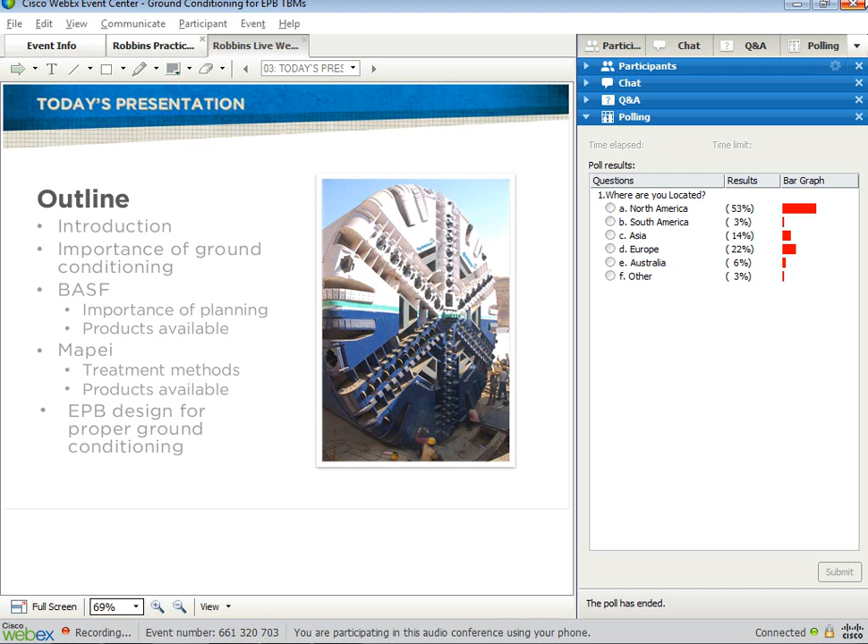Today's webinar is going to cover the introduction that I'm doing now, the importance of ground conditioning, which Desiree Willis will speak to. I'll introduce her in a moment. Then Jaime Ibarra from BASF will be talking about the importance of planning and products available from BASF. Richard Schulkins will be speaking from MAPEI regarding treatment methods and products available from his company as well. And then the last formal presenter will be Brad Grothen from the Robbins Company, talking about EPB machine design for proper ground conditioning. So with that, I'd like to get started right away by introducing Desiree Willis.

Desiree's been with the Robbins Company for almost 8 years now. She does research and a lot of writing. She's traveled the world visiting various tunneling projects. The latest research that she's done covered 25 projects, 10 countries, using 40 different EPBMs. The research that she and Joe Roby pulled from that white paper is really what led to this webinar. So without further ado, I'll introduce Desiree. Desiree, take it away.

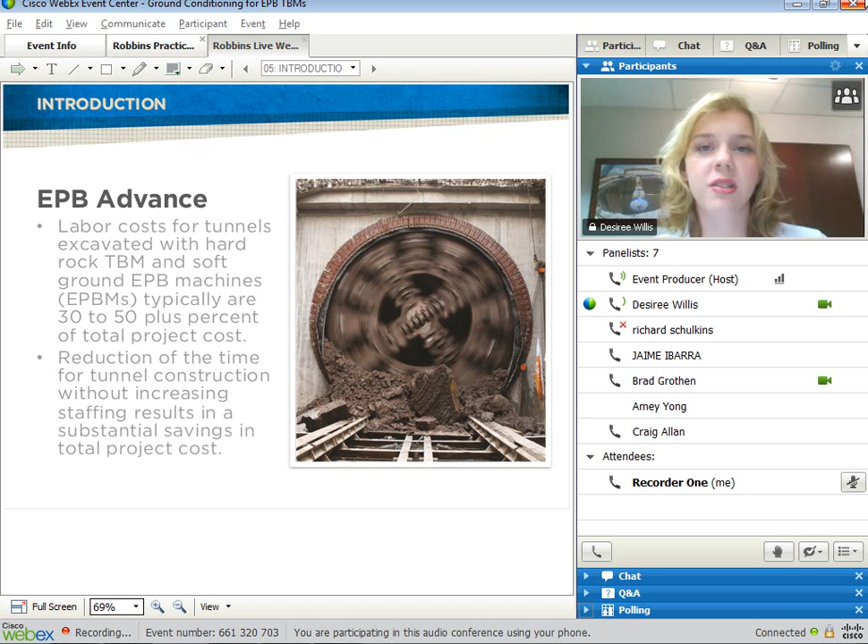Thanks, Craig, for that introduction. We're going to go over a little bit about a study that we worked on. Over the years, we've found that labor costs for tunnels have typically been 30 to 50% or more, and this is true whether it's a soft ground project or a hard rock project. With such high costs, we are constantly looking at ways to reduce the time for tunnel construction without increasing staffing, which could result in substantial cost savings on the project.

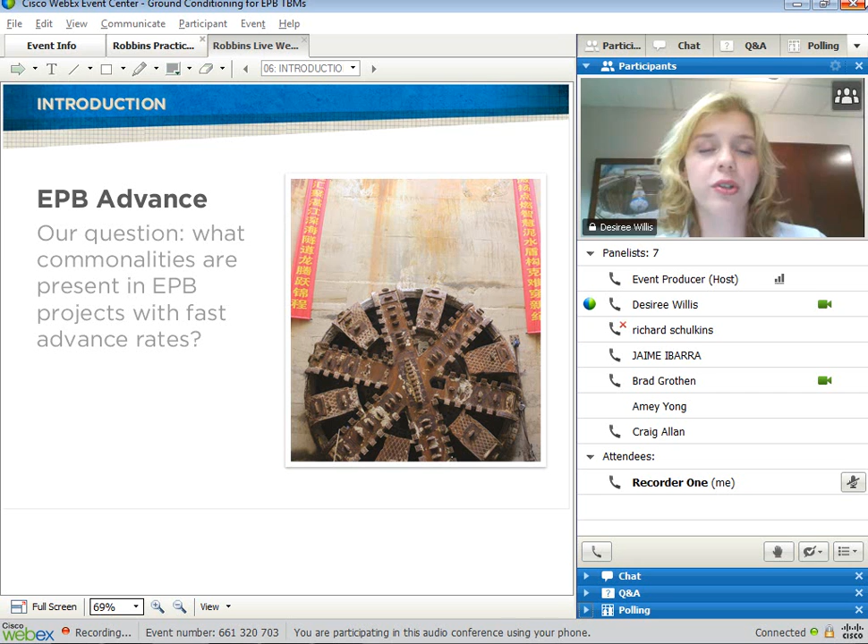So we asked ourselves the question: what commonalities are present in EPB projects with fast advance rates? In particular, we wanted to look at mixed ground projects because this is becoming a higher percentage of our EPB projects. By mixed ground, we mean a mixture of materials that are easy for EPBs to excavate, such as soils, clays, and sands, and a mixture of materials that are not so easy to excavate. That might be consolidated hard rock, large boulders that can't be broken up with disc cutters, and coarser sands and gravels.

So we looked at about 46 EPB projects from all over the world, all TBM manufacturers, and we were looking specifically at average weekly advance rates based on 2 twelve-hour shifts, 7 days a week. These advance rates were given to us by contractors on the condition that we kept the names of the projects anonymous, so it is numbers and specs only.

We looked at a few different factors: ground type, tunnel length, water pressure, type of drive motor (that might be VFD or hydraulic), ground conditioning, the type of muck removal (that could be continuous conveyor or muck cars), the cutting tools installed in the cutter head, the location of the project, and the experience the contractor had with EPBs.

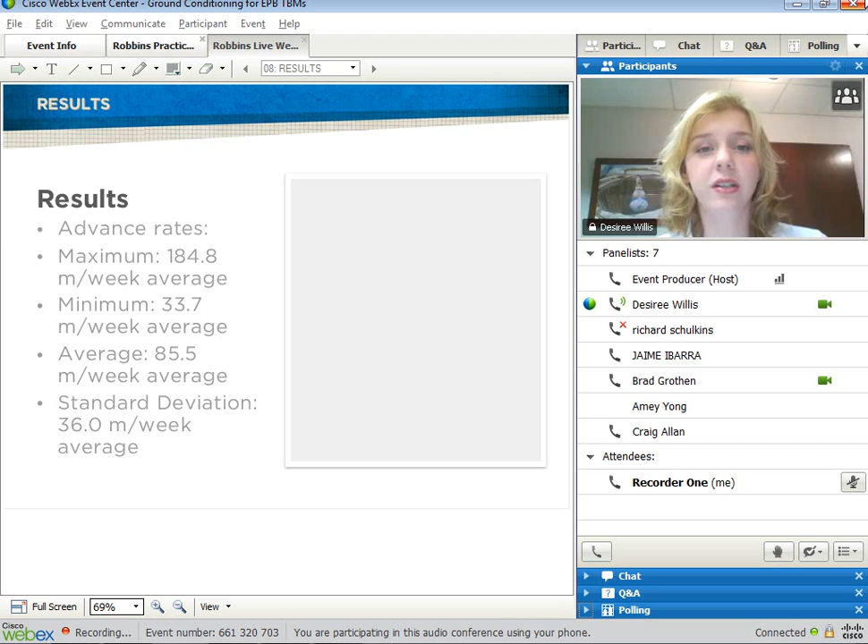This just had a breakthrough picture on it, but our results were wide-ranging. Our maximum advance rate was 184.8 meters a week. Our minimum was 33.7 meters a week. When we averaged all the projects together, it was about 85.5 meters a week. You can see it runs the gamut.

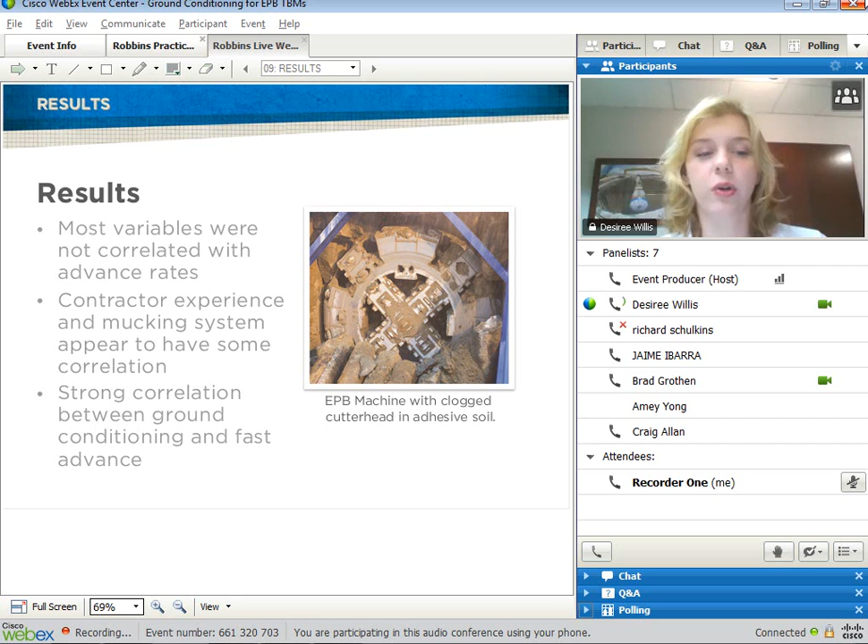When we looked at what correlated with advance rates, most of the variables were not correlated at all. Contractor experience and the type of mucking system were lightly correlated, but there was a very strong correlation between ground conditioning and fast advance rates.

With that, we'll come to our second poll question. In your opinion, what is the most important factor in determining EPB advance rates? You can answer A, machine design; B, contractor experience; C, ground conditioning; D, muck removal method; or E, geology and water pressure. We'll leave this open.

While we're waiting for the poll question to be answered, we've had a question come in. Desiree, somebody has asked, are there more materials I can read or presentations I can watch on these topics? Yes, definitely. We'll send out an email after this webinar detailing a few additional materials you can look at. In particular, we have a paper on this study that will be presented at the North American Tunneling Conference next week in Los Angeles, June 22nd to 25th. Our presentation is on Tuesday in the 1:30 session, so it should be around 4 o'clock, and the paper will be in the proceedings as well, so that's a good resource.

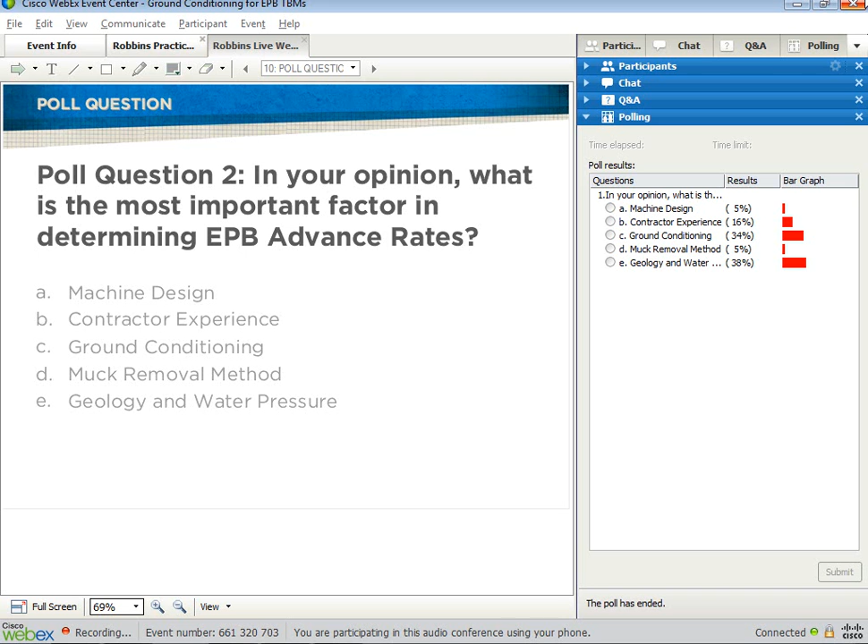Okay, you should see the results. Yes, it looks like a lot of people think ground conditioning, a lot of people think geology. I agree with both—I think that just affirms our results. Geology and ground conditioning really go hand in hand. So now we'll talk a little bit about ground conditioning in general and introduce the topic before we go more in depth.

Based on our study and what we have observed, ground conditioning is equally as important as machine design and the logistical aspects on any EPB project. Using ground conditioning can not only improve the muck flow through the cutter head, it's also been shown to reduce wear on the machine and increase advance rates.

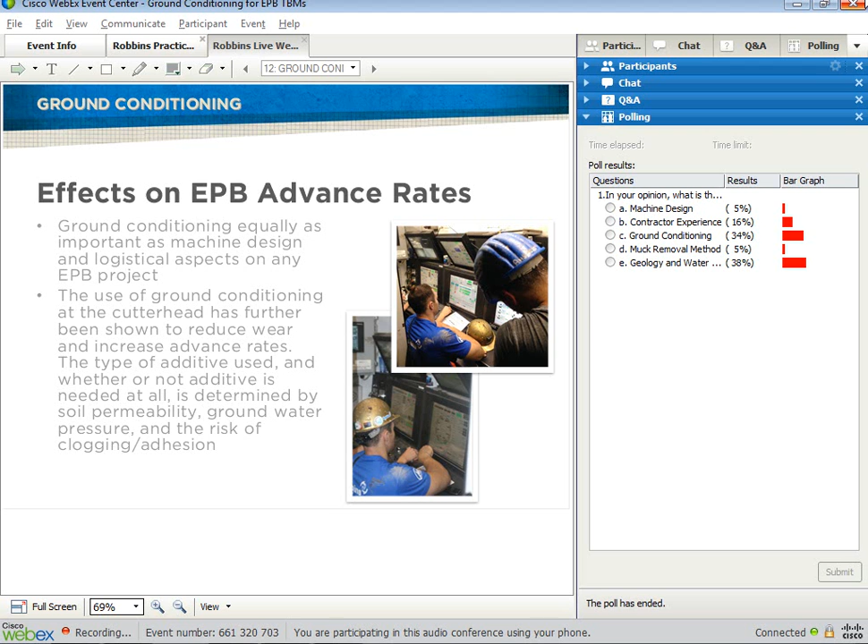Some of the imperative things needed for a program are an accurate geotechnical baseline report—a report that details the hydrological and geological aspects of the project. In addition, laboratory testing is absolutely necessary to determine the proper ground conditioning regime. Almost all projects have various different types of ground, and you need a sample of each to determine which type of additive works best.

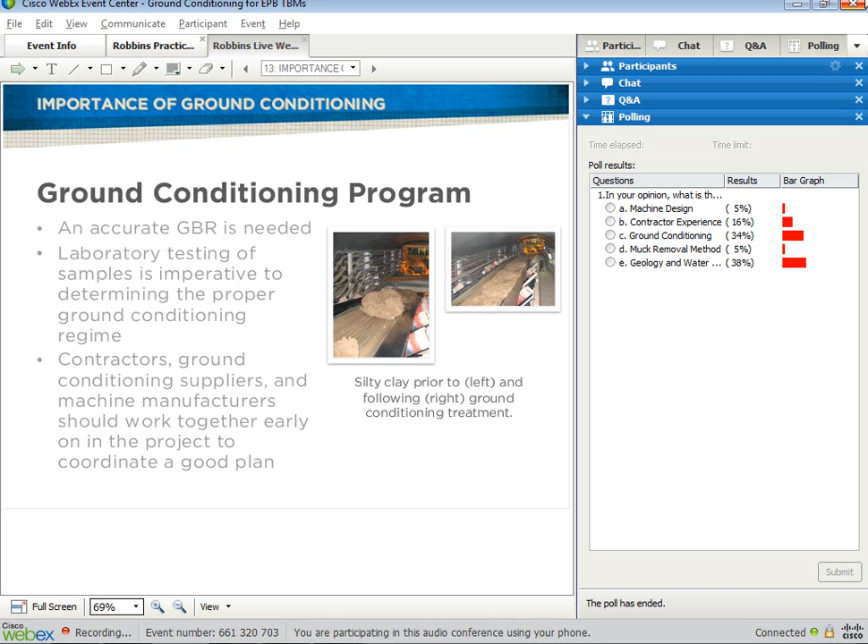Finally, contractors, ground conditioning suppliers, and machine manufacturers need to work together very early on in the process to make the program work correctly. This means even before the TBM is built, so that the machine can be designed to provide that proper ground conditioning program.

Here we're going to play a video. This is from one of our projects in Mexico, the Emisor Oriente wastewater tunnel. It will show a before video, before we added additives, so you can see how liquidized the muck is and how difficult it was to get through.

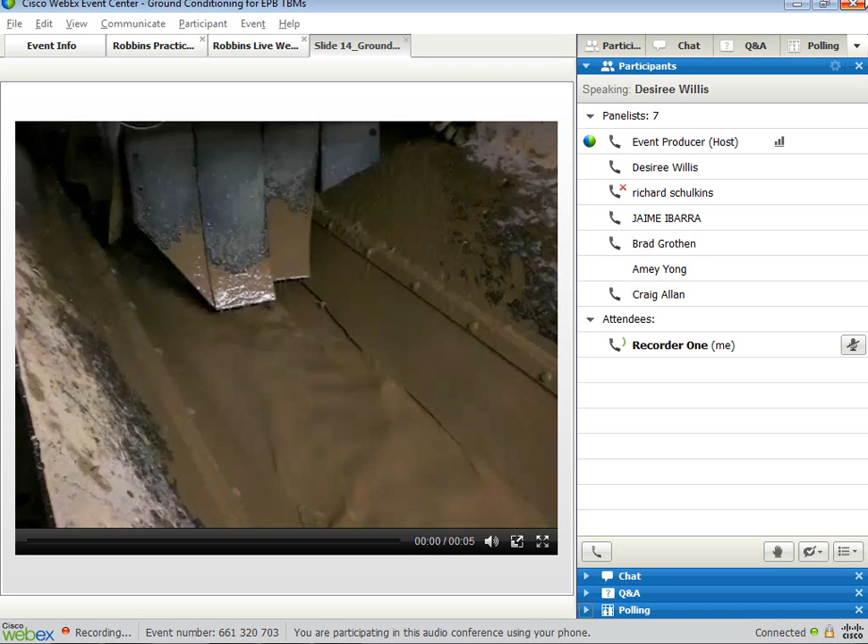Now we're going to show an after video, after we added the ground conditioning agent. This really helps to consolidate the muck and make it easier to remove. You can see the toothpaste-like consistency, which is really what is desired in ground conditioning—it just makes it easier to transfer the muck. We'll play it one more time.

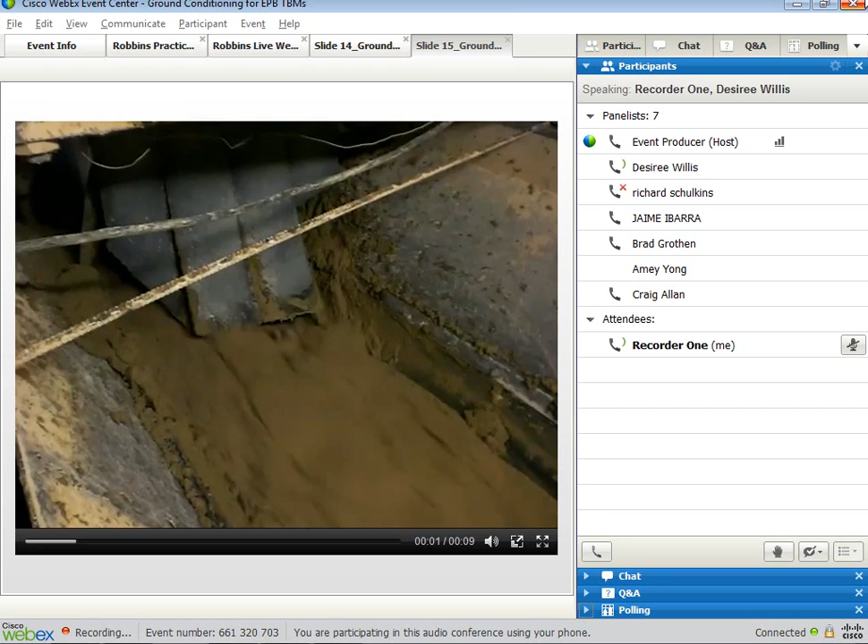Okay, so that is just an introduction on ground conditioning. With that, I'll turn it back over to Craig to introduce Jamie.

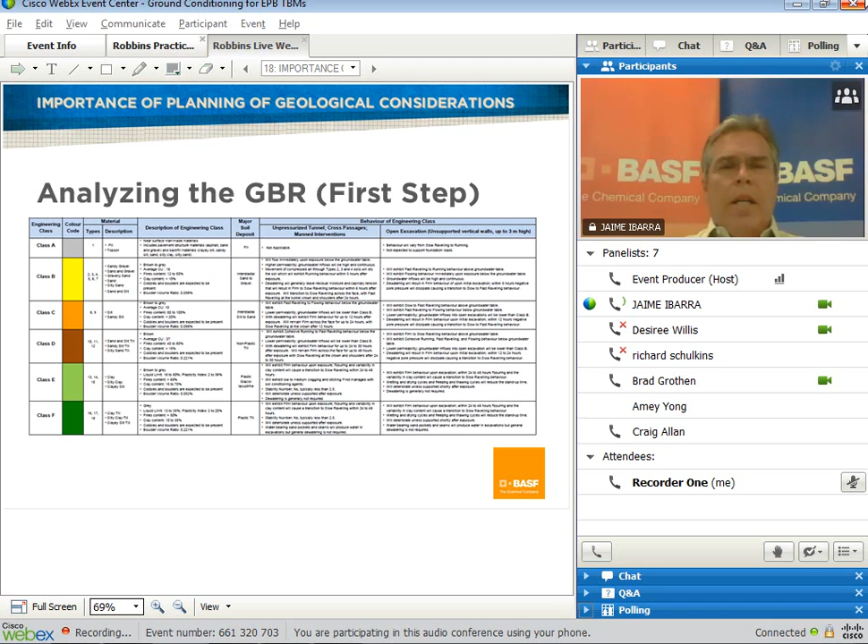On our side, the first step is very important: to have the GBR in our hand, as precise and accurate as possible according to the studies made by the geologist. We analyze this information very thoroughly.

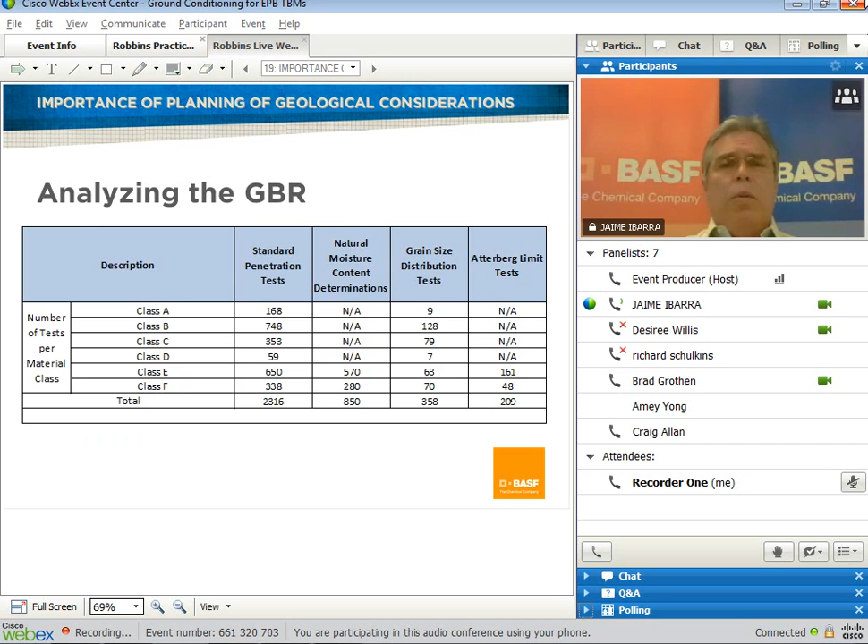We look into this information to evaluate what kind of soil or ground the TBM is going to be dealing with. Most of the time, we only see a portion of this geology profile because of the boreholes. The boreholes are made at a distance of between 100 meters, 500 meters, sometimes even a kilometer, so we don't know what is in the middle.

The geology is so important to us because the TBM is going to be dealing with different types of ground at the same time. Sometimes we have a mixed phase, sometimes a unique type of ground, which is ideal because it's very homogeneous, but most of the time we have different types of ground. The machine deals with soft ground on top, hard rock on the bottom, and clay on one side, and we need to know that information in order to do the studies in our lab.

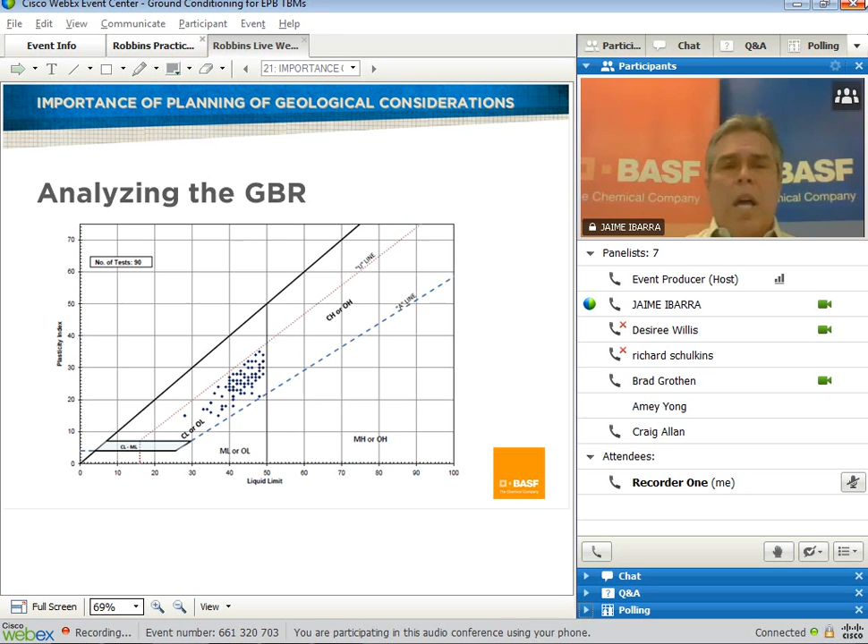So we analyze the GBR to see what type of ground we have. We look into the information to see if the ground is sticky, is coarse, is rock, and then we prepare ourselves for the next step.

The next step is the lab test. It's very important before the TBM is even launched. The TBM has already been designed by the manufacturer according to the GBR, and on our side we do the same analysis to determine and recommend what type of soil conditioning the contractor is going to need to prepare that ground for that type of TBM. So it's a reference point, always a starting point, and I would take it as a second step.

First step, analyzing the GBR. Second step, we see what the soil samples provided to us tell us, and then we can compare that with the GBR. So first we run the same tests that the geologists did for the GBR, but this time with the sample we get from the contractors.

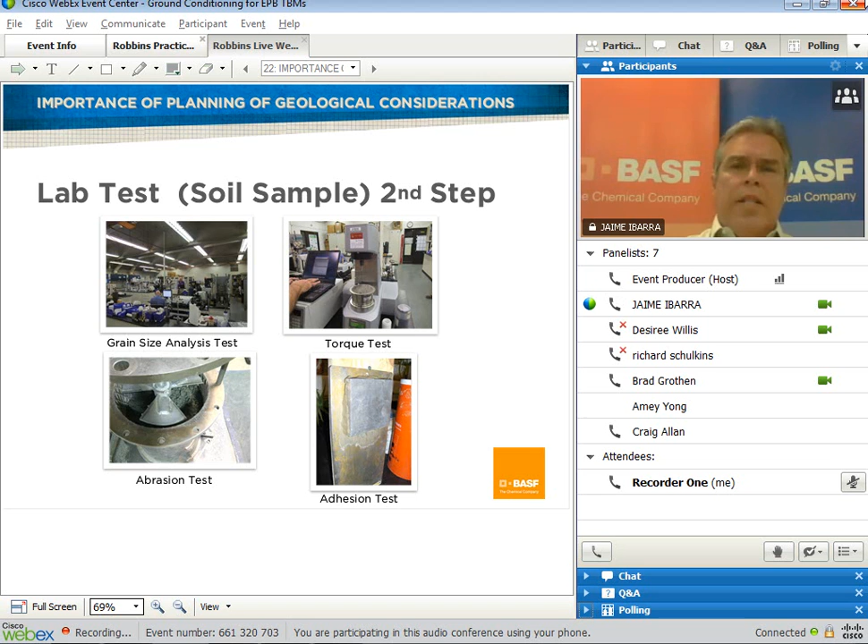We do all kinds of tests, as you can see in this slide: torque test, abrasion test, sliding test, grain size analysis, stickiness, and so on. Why are we doing this?

We're doing this because, as everybody in the industry knows, there's a range of different technologies for different types of geology. So if we're working in clay, we're going to use an anti-clay polymer. We're using sand with water. We're going to use another type of surfactant, with the polymer or without it. So it all depends on this lab test for the application of the technology we want to recommend to the contractors.

What we do is prepare the ground for easy transportation. EPB machines work in certain conditions. First of all, we need to fill up the chamber, guarantee that the chamber is full of material and not full of air, to guarantee the easy flow of the ground through the cutting head into the chamber, through the screw conveyor, belt conveyor, and then to the disposal pit.

But we also always need to think about how that material is going to be transported to the filling land or landfill places assigned to the project.

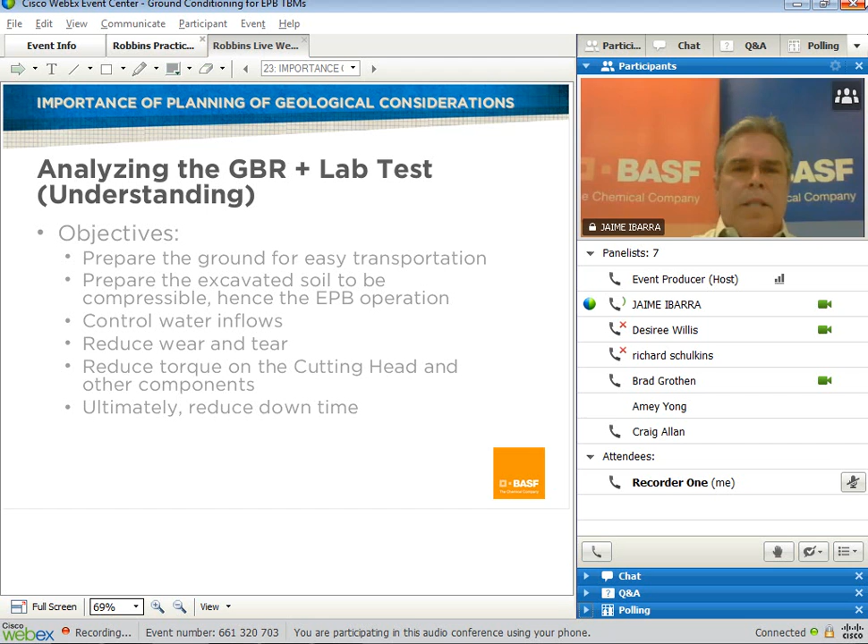While we're analyzing the GBR and doing the lab test, we can get the ground as it is from the project and prepare it to make it ideal for working in this EPB. What these ideal conditions are going to be depends on the operation of the TBM, the design of the TBM, and also the soil conditioners.

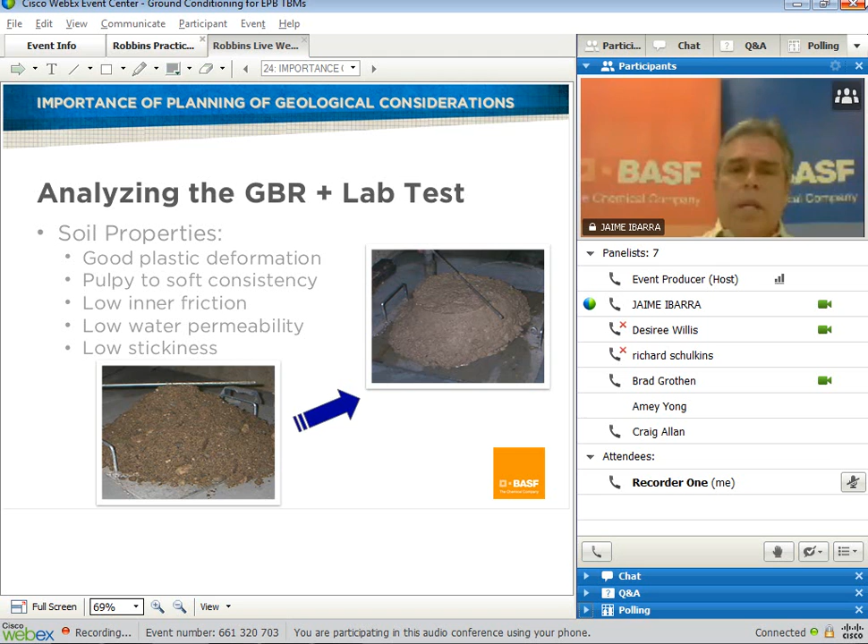As you can see in the pictures, this ground is given to us as very coarse sand, very rubbly, very loose, and we turn it in the lab into a paste that we believe will be the best condition for the TBM.

Here's another example of what we do in the lab. We test the material as it is before we apply any technology that can be used in this type of ground. In this case, it's a very sticky material - it sticks everywhere, it's sticking to this blade. It's going to stick in the cutting head, it's going to plug the cutting head, and therefore it's going to slow down the production rates.

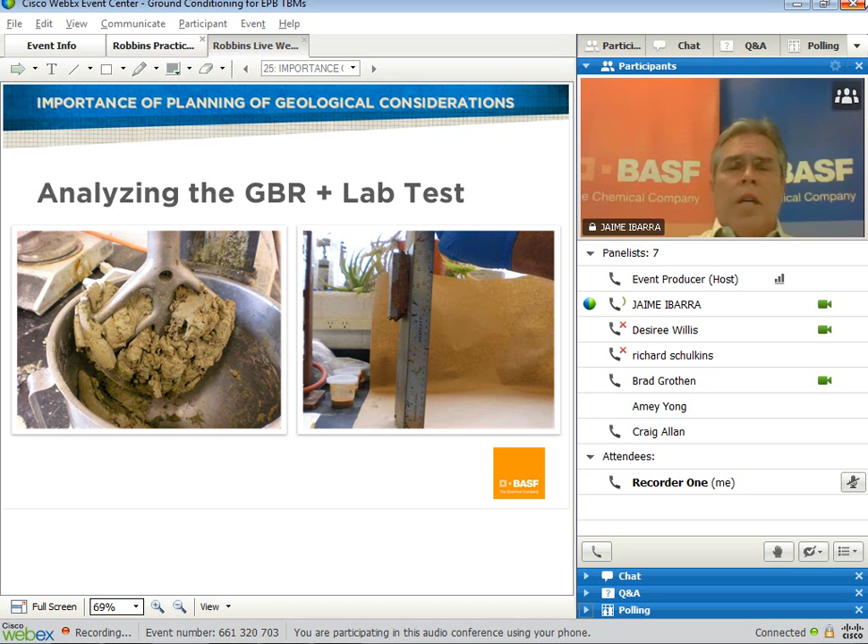We do another test we call a suction test or abrasion test. When the ground is very tight, it closes around the TBM, and the TBM needs extra force to propel forward. I don't call it friction force - it's more like a suction, a vacuum pulling the machine, not letting it go because it's too tight around the machine.

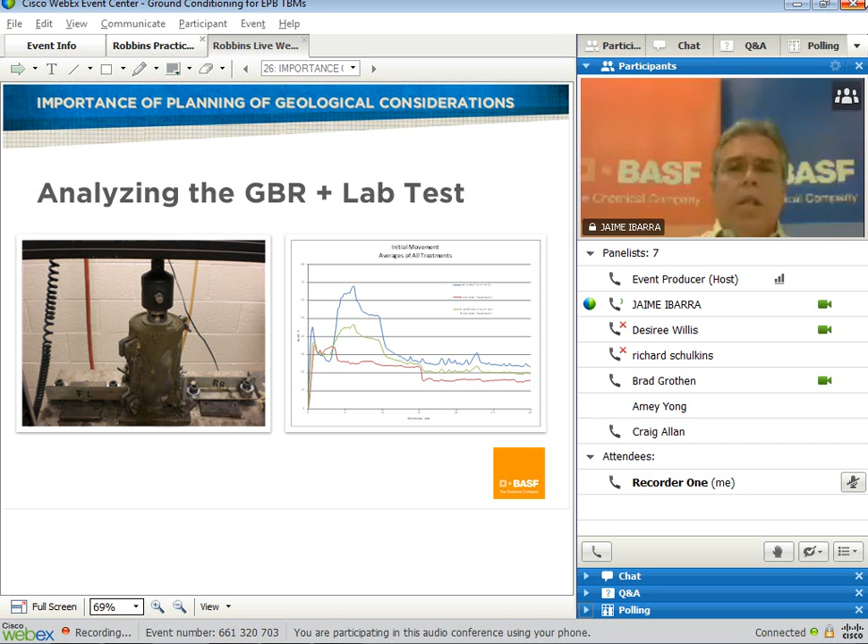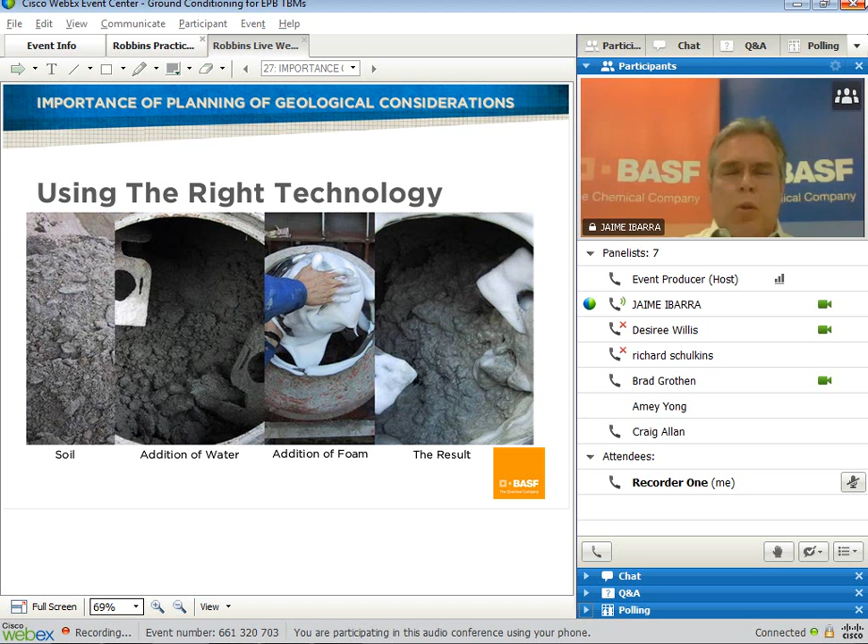So we need to know how the ground is going to affect the TBM, and affect the production or advance rate. What we do is analyze the GBR, perform lab tests, and apply the right technology to the geology given - using what we believe is the right technology for that type of geology, preparing the ground for the TBM to be successful.

So now my next slide is just to give you some examples of proper soil conditioning after testing. I believe Richard Schulkins from MAPEI is going to talk about applications on the job site, but these are some samples we can show today as a result of very good analysis of soil conditioning.

On the left-hand side, this is the Ballard Siphon in Washington. They had oversaturated sand - I believe it was 20% oversaturated. We turned it into the right side, ideal for transportation, and the TBM finished the tunnel successfully. They were having a lot of problems in that project until we did the lab test and came up with the solution.

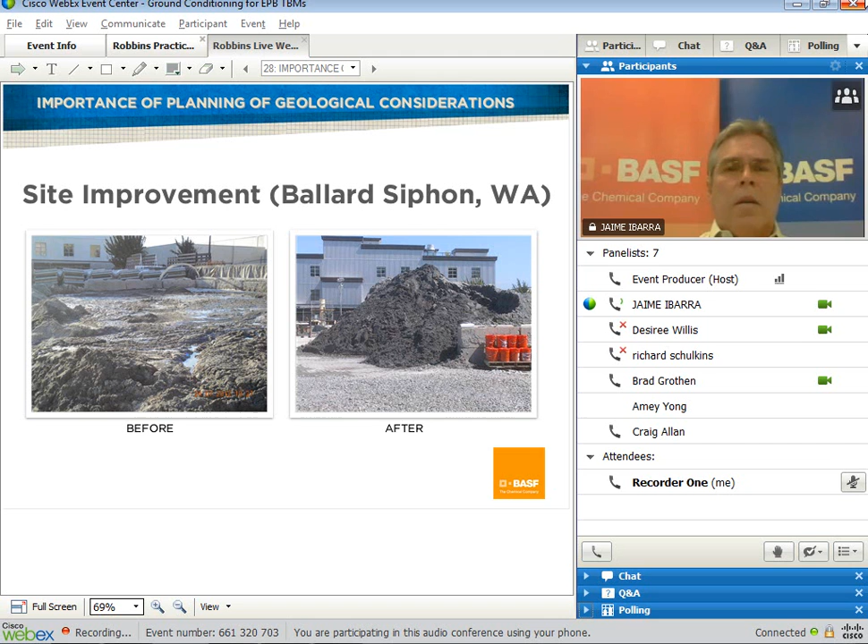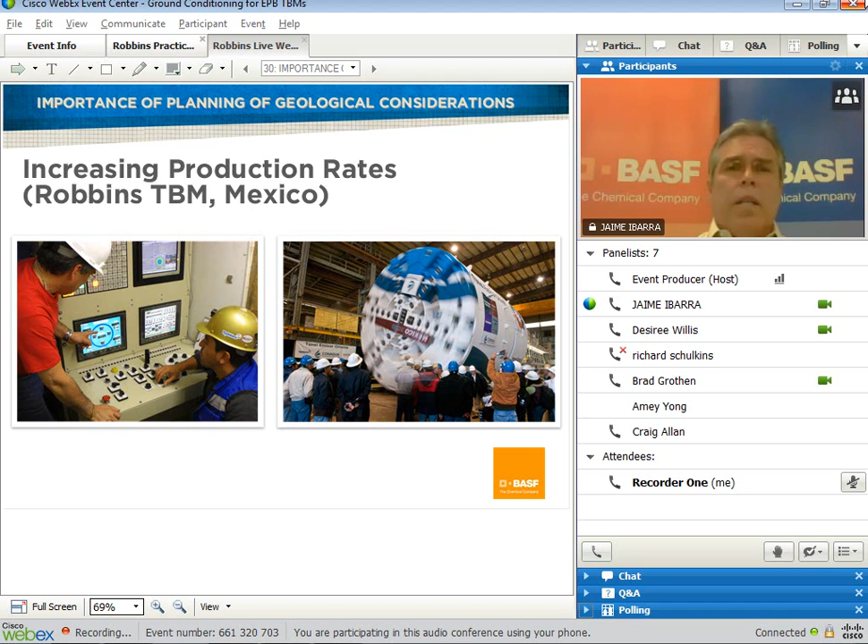In Mexico City, I talked about this project already, but the clay they were having was slowing the TBM to 35 millimeters a minute, which for a lot of people is a good rate. For us, everything can be improved. We came up with the right technology for the type of geology they were drilling, and the machine went from 35 to 93 millimeters a minute - moving forward at the right speed.

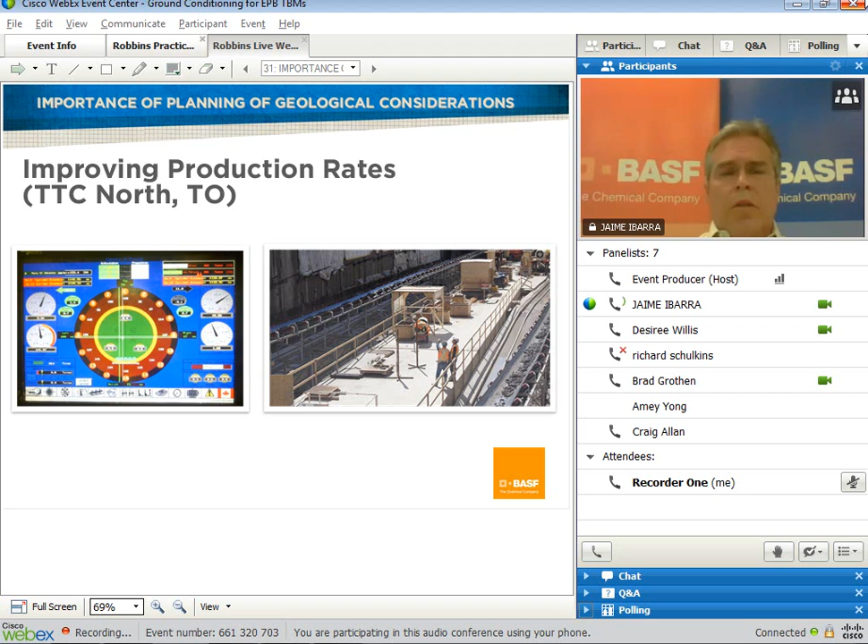This was in Toronto - again very sticky, very hard clay. They used the right technology, and the machine, as everybody knows, finished the tunnel successfully. At the end of the project, they were producing 50 rings per day across two machines, 25 and 25, an average rate of 25 rings per day.

So now we come to poll question number three: Have you personally noticed improvement in EPB projects when ground conditioning is used? The answers are A, yes; B, no; C, not involved in EPB projects. So now I turn it to Craig, and thank you for your attention.

While we're waiting for the poll to be tallied, there's another question that's come in: what are some recent examples of machines that have done very well and gone fast that had good ground conditioning programs?

And I can take this one. Oh, yep, sorry, go ahead Desiree. Go ahead. Yep, go ahead. I'll give an example, and then you can, Jaime.

There's obviously a lot of examples. There's a good one at Central Subway in California. Those machines were using a mixture of anti-clay polymer and foam. They just broke through last week, and they were able to excavate 40 meters in 24 hours, and over 500 meters in one month. They were also able to go under some live rail tracks with less than 4 meters of overburden, without any compensation grouting. So that was a great project there.

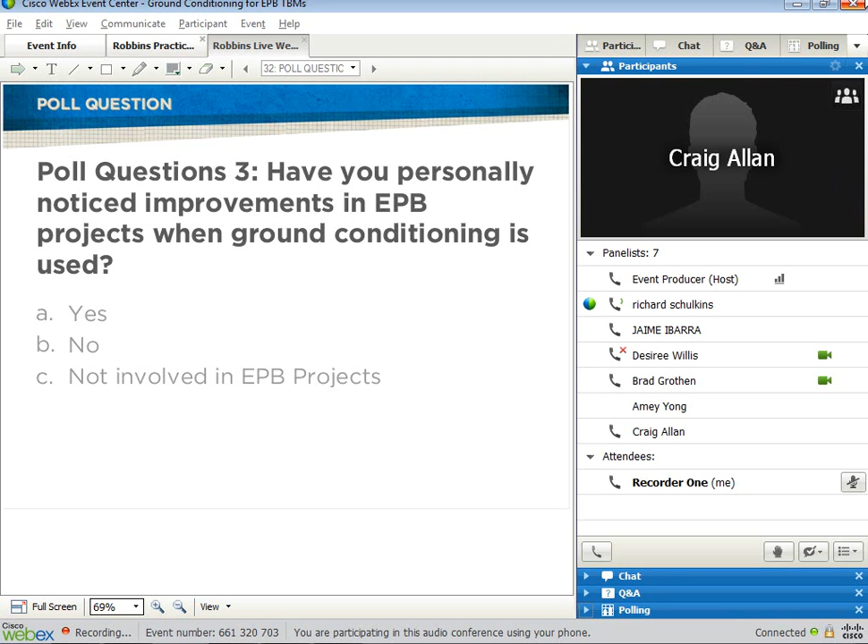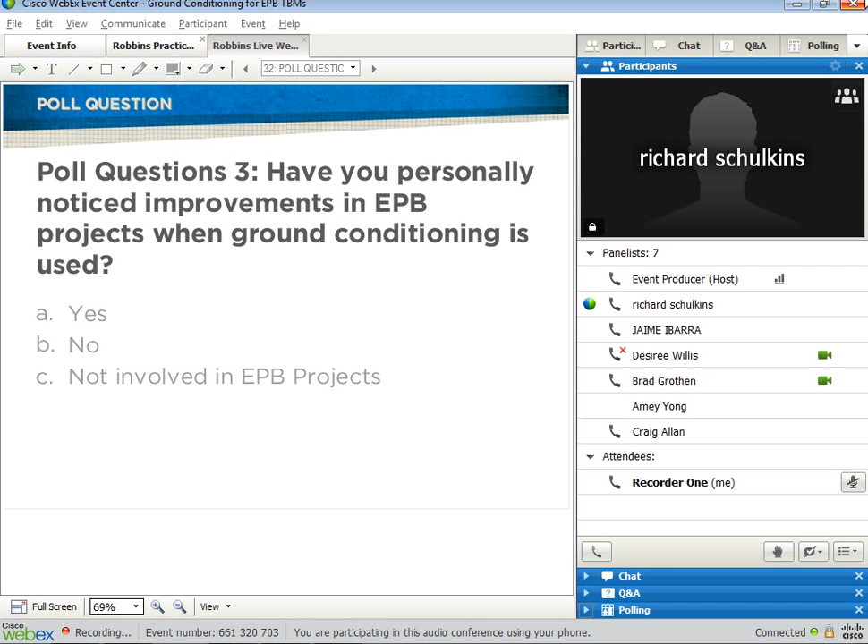Thanks, Craig. Yes, my skiing ability is not fantastic. Lucky for you guys, you don't actually get to see me, though you do get to see the dreadful photograph there. So, moving on - well, thanks, Jaime, for your presentation, and here we go.

Steps to address changing geology in mixed ground conditions.

There's a little bit of repetition with what Jaime said, but I'll try and move it on to what happens later on in the production in the TBM.

For every distinct ground condition, you should have a few kilograms of samples for your testing: all your granulometric curves, Atterberg limits, moisture contents, permeability records, and in situ strength. Without that, before you start, you're really on a hiding to nothing. You're going to get into trouble.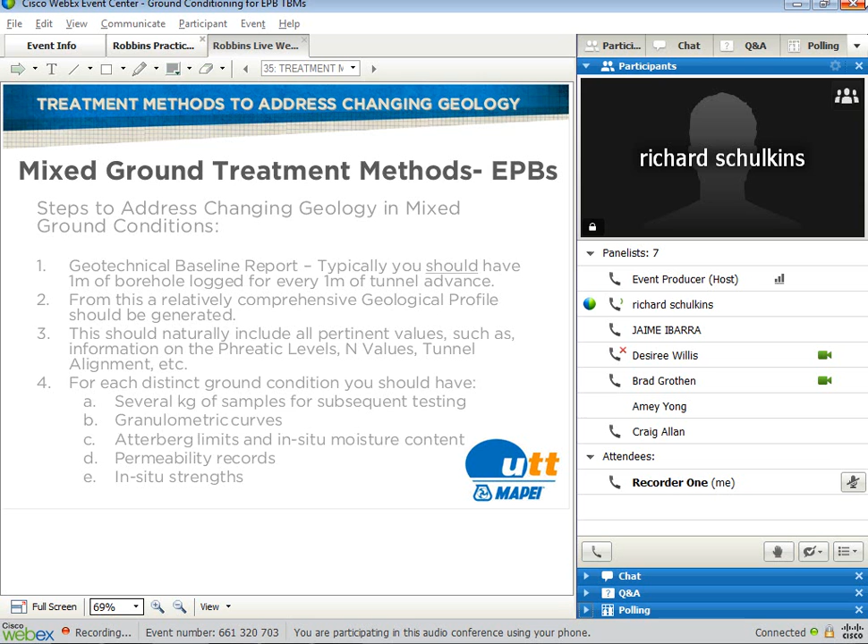Just to give you an indication, these are a few random soil samples from around the world given to us by the Polytechnic in Turin, and you get the clear idea that every kind of soil exists. There's no one soil that's the same, so you need a plan suited to your particular tunnel drive, otherwise you're not going to be able to go as well as you could.

I'm sure you've seen the next slide before. Once you've got your granulometric curve, you can fit it into this logarithmic graph, and you can see pretty much what kind of ground conditioning you're looking for.

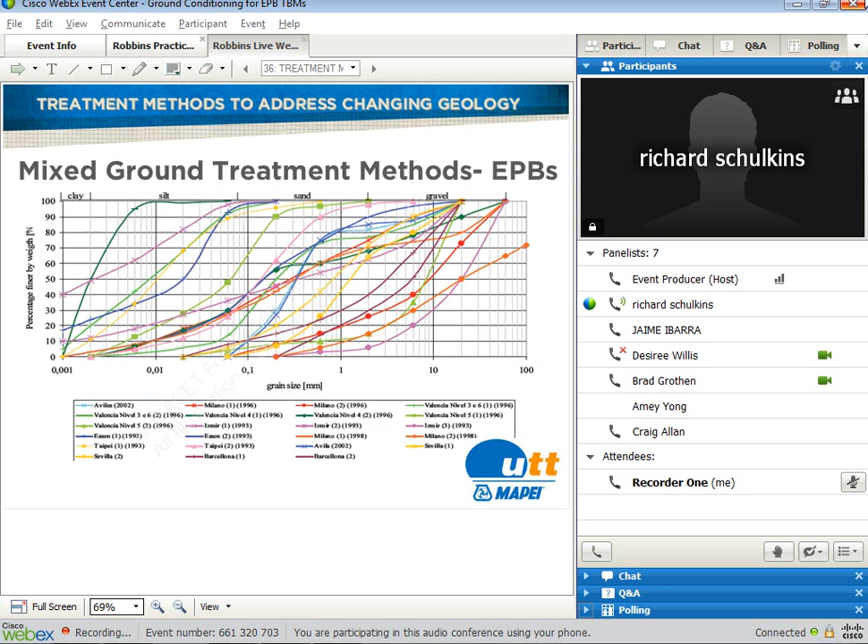You also need to consider the skips, conveyors, or pumping of the soil, because it's not just about cutting the soil, it's also about getting the soil out of the tunnel.

Face pressure required, obviously. TBM selected. I was a little surprised in the poll that you didn't think that was so important, but I think a lot of people would consider that critically important, especially the cutter face design. With a bad cutter face design, you're not going to go anywhere.

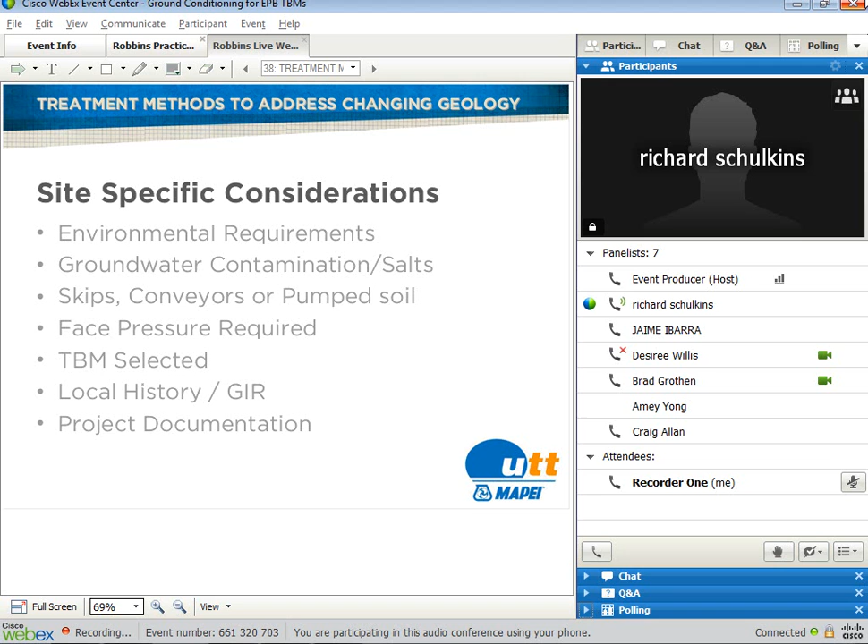Local history - you're going to have tunnels that have been through the same ground condition before. You're going to get a good indication from there.

Quickly going through the testing you can do. Once you've got your soil samples, if you're keen, you can make your own foam generator. It'll cost you a few thousand dollars, but it's worth it because you get good foam. If you're not so keen, you can also get a good indication from just using a liquidizer or cocktail blender. Any proper man will have one of these in their household.

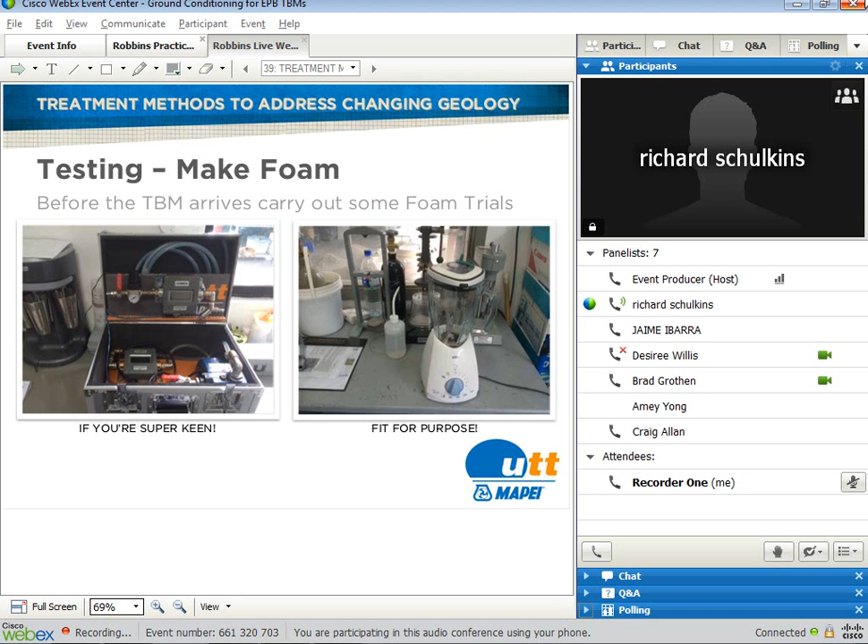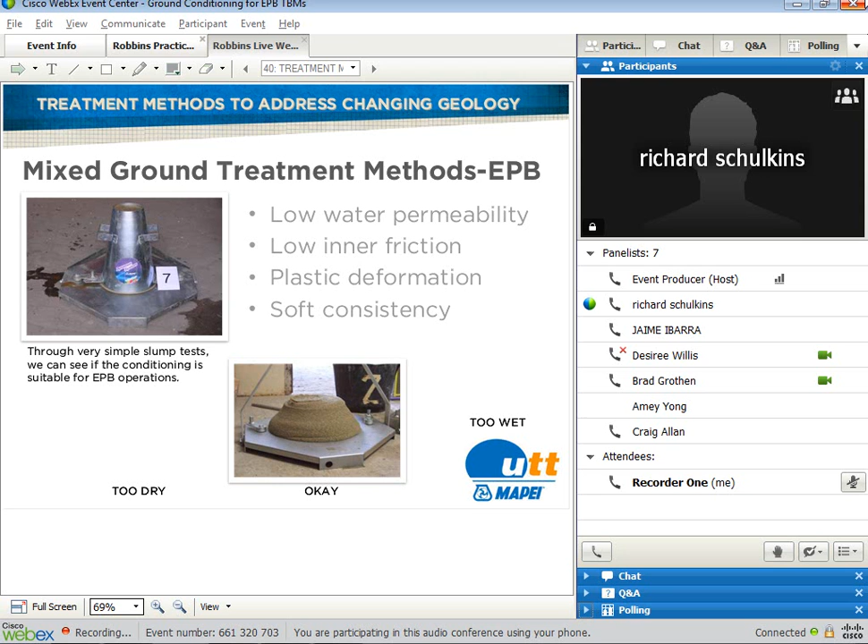When you're actually on the TBM, one of the best ways to check whether your ground conditioning is done correctly is just by using a simple slump cone. It's the same in many ways as considering concrete. You want your soil to have some slump. If it has no slump, it's not going to move through the machine. So you don't want it to have too much, and you don't want it to have too little. You need to be looking around about 6 to 12 centimetre slump, though obviously that can vary as well, but that's the general idea.

If your soil's too sticky, you can find out in the beginning just by adding water. Quite often people add too much water and make the soil or clay too sticky to start with. It's not always good to add water to clay because all you're doing is making a sticky problem. If the clay is wet already, you can use a clay dispersant to help disperse it. But if you've got dry clay, adding water just makes bigger problems, and dispersants don't actually penetrate into dry clay, so you need to look towards more of a polymer that will excavate dry lumps encased in a polymer slurry.

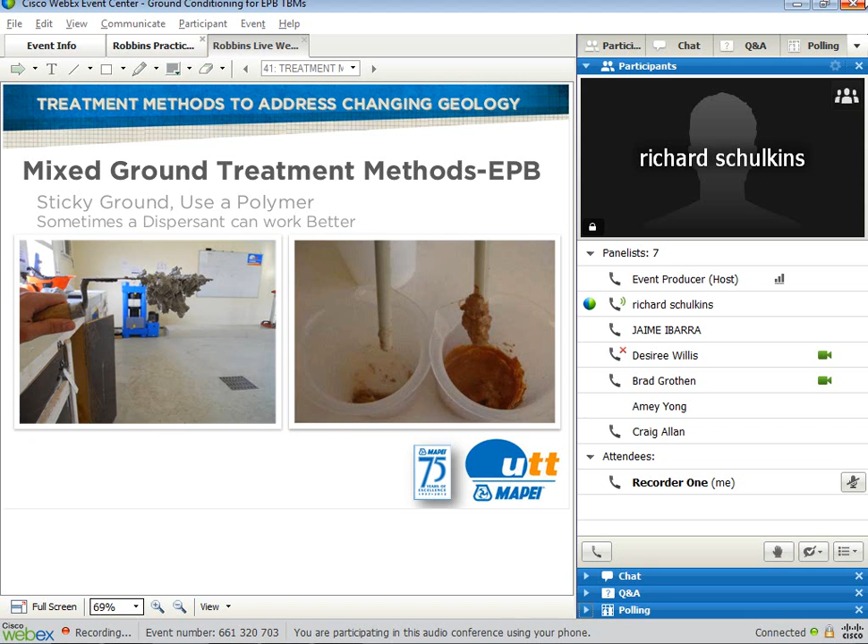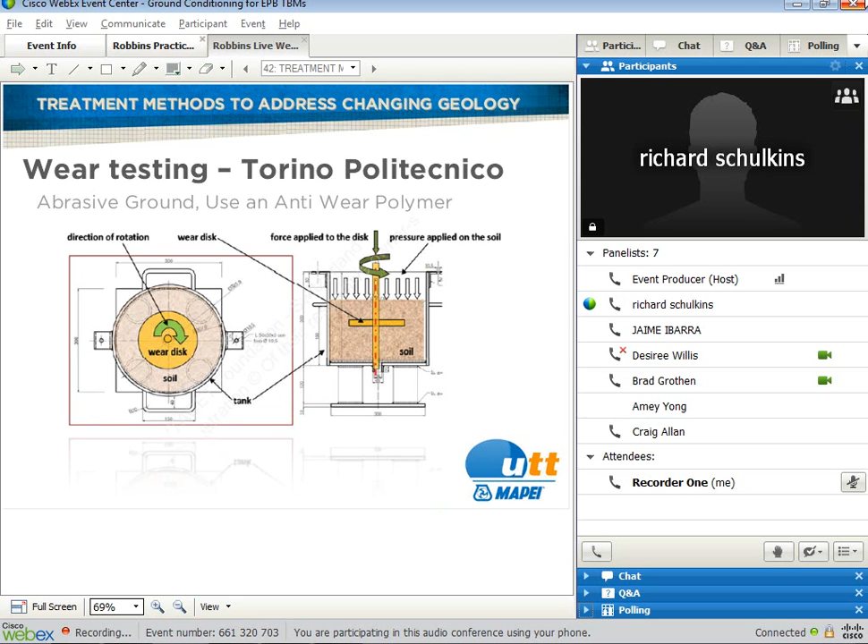Also, one of the things you should be looking at is tools - they cost a lot of money, so you want to be reducing the abrasion on the cutter head. You also want to control the permeability of the soil. If you can't control the permeability of the soil, you're going to get a lot of problems with running silt sands through the TBM. You're not going to be able to control earth pressure very easily, so you really want to keep the permeability of the soil as low as possible, using foams, sometimes foams and polymers, even bentonite.

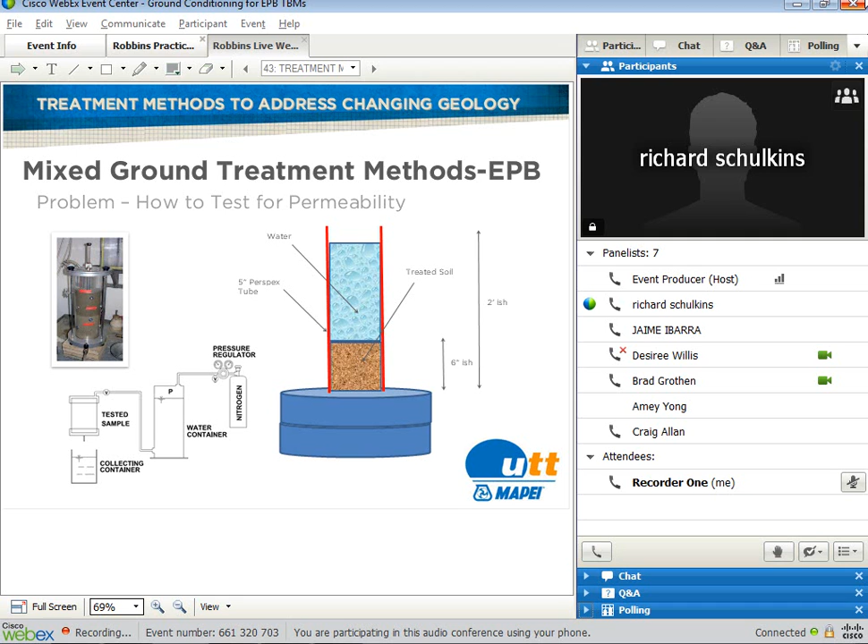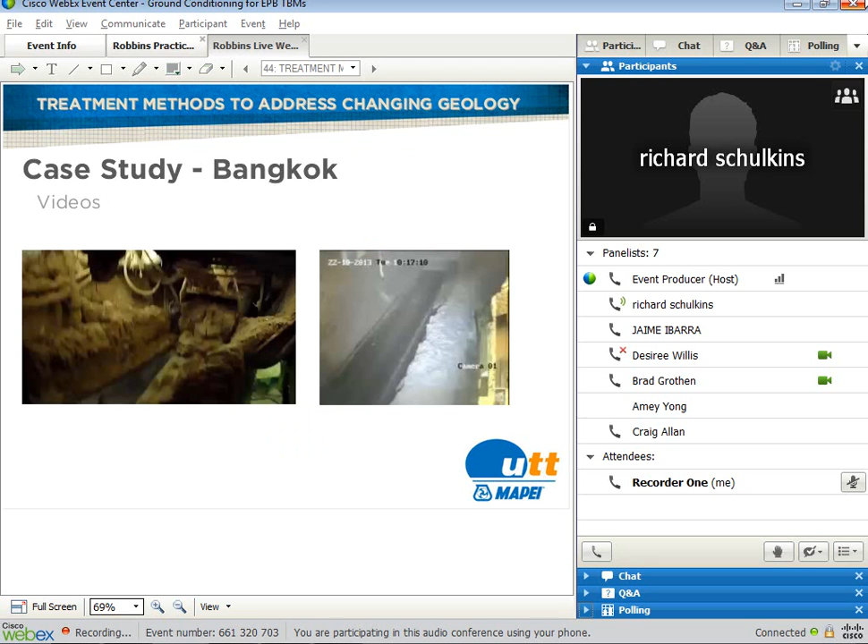Here we have a couple of videos showing a case study or a job we worked on in Bangkok. If you don't mind, play the video on the right.

Okay, here we go. This is the before shot, when we arrived on the job site. I think it's quite clear that they were unable to control earth pressure. It was a bit of a mess.

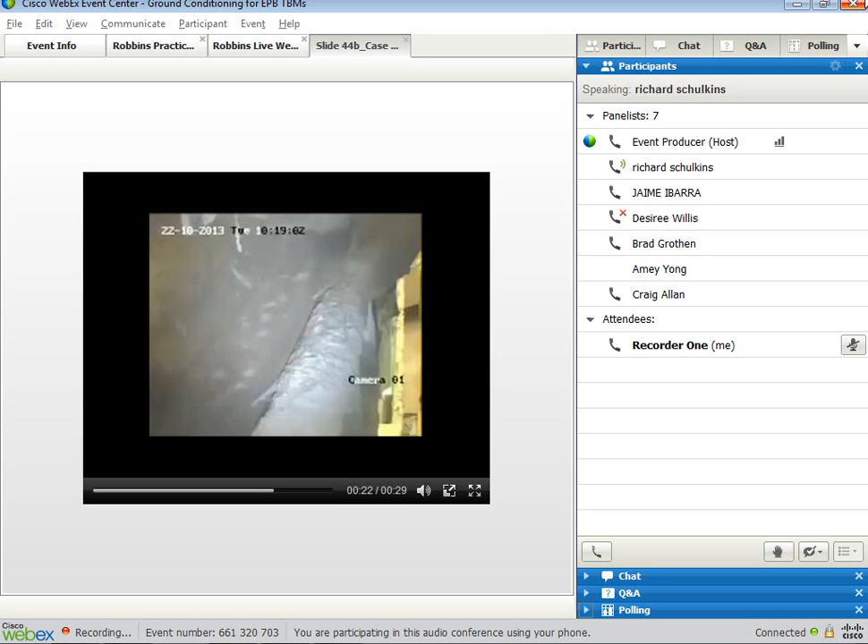Fortunately, when you have a huge range of products and you can check the soil and the ground conditions, then you can address it. In this case, we added a polymer, and we were able to, within about 30 minutes, change the conditions from what you've just seen to the conditions you see here.

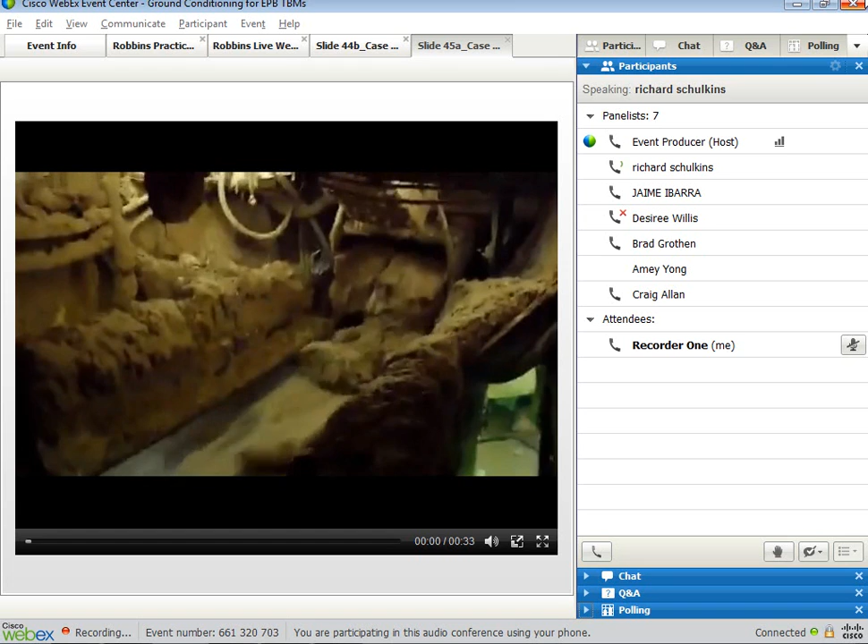You have to trust me, it is the same TBM, same ground conditions, just a little bit later on. The first was taken off the TBM camera, and this one was taken on my iPhone.

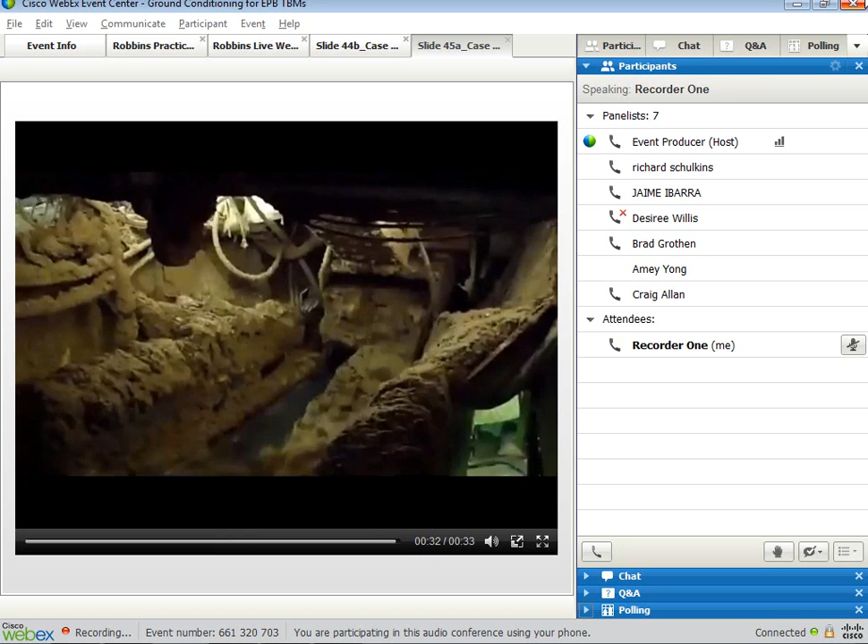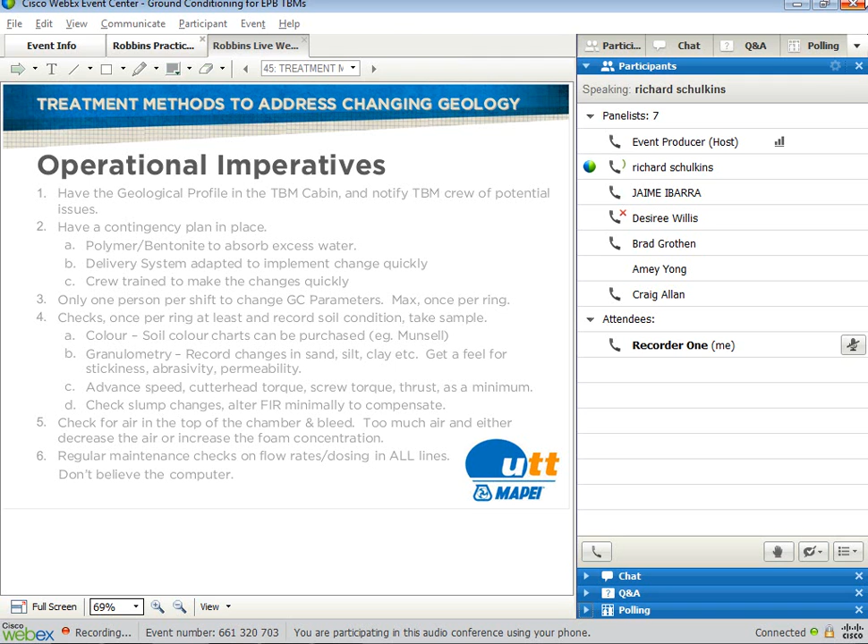So, anyway, what do you do? When you've started the tunnel, you've got all this information. You need to have your geological profile in the TBM cabin and notify the TBM crew of all the potential issues, specifically things like soil interfaces, where you normally hit most of your problems.

You have to have contingency plans in place. You need to have polymer and bentonite to absorb excessive water. You need to have your guys install the system rather than retroactively install it when it's too late and you're already in trouble. And you need to have your crew trained and know what to do so they can change over from an existing system to a new system as quickly as possible with as little issues as possible.

Common issues that cause problems: you always have so many people on a TBM wanting to change the ground conditioning parameters, but you really only need one guy doing it, one guy in control, otherwise it's a disaster. Too many changes, too many problems, and you only really need to change the ground conditioning once a ring, maximum.

The checks you need to do to find out whether you're going to get into trouble: at least once a ring you need to take samples and check the colour. It might not sound very important, but if you see colour changes, you can probably see that there are soil changes coming ahead. You can get colour charts from a guy called Munsell, available on the internet.

Granulometry, you can get it in your hand. You can see whether you've got more silt, sand, or clays, get a feel for the stickiness, abrasivity and permeability, so you can anticipate changes before they happen.

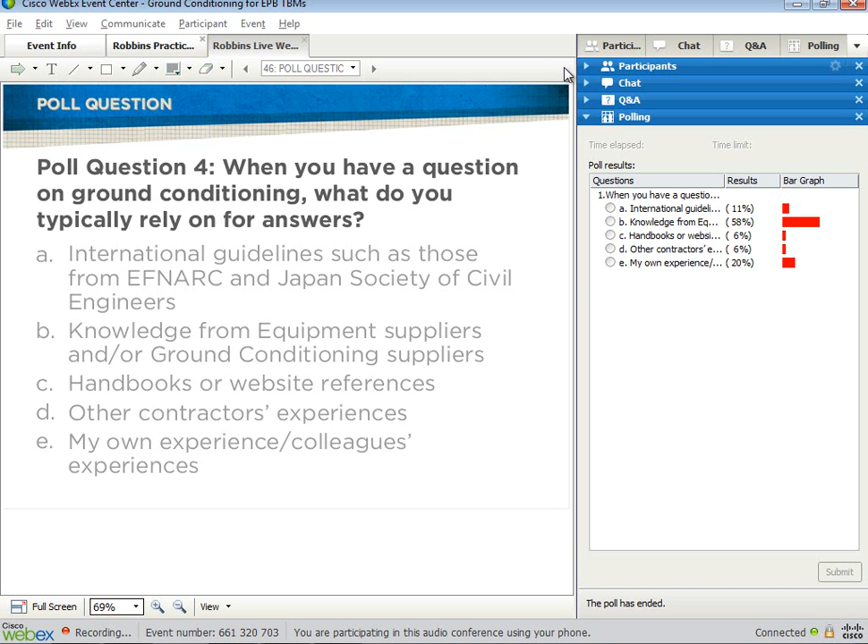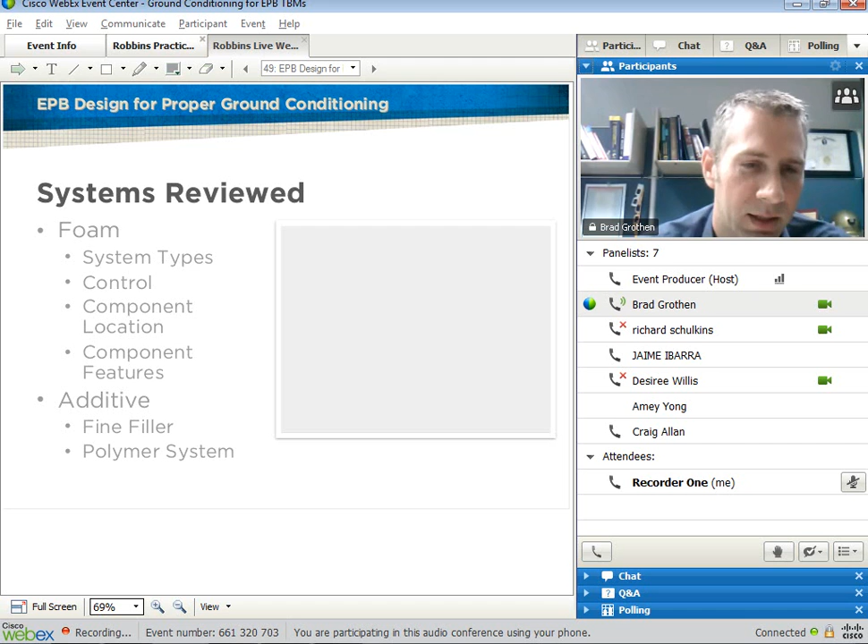Thank you very much, Craig. This section of the presentation, I'm going to concentrate on the equipment associated with ground conditioning, primarily the foam system, where we'll spend most of the time. I'll start off at a system level, then come down to components and component features we'd like to see, and at the end touch on a couple of additional systems we may want installed on the machine.

Foam systems traditionally are supplied in two basic varieties. For the sake of this presentation, I'll refer to them as batch and continuous. First I'll go over the batch system, then go over some features you're going to see in both systems, and then look at some of the specifics to each one of those systems.

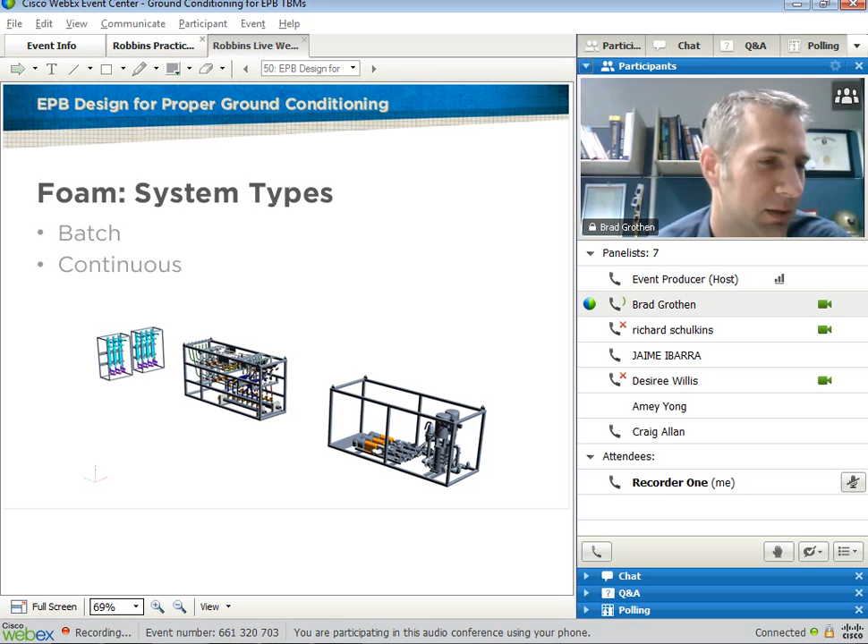Looking a little bit closer, here's the foam generator. We have the air and fluid coming together at the generator. It's not as fancy as Richard's blender, but what we're trying to do here is entrain the air inside the fluid, forming very, very small bubbles. As that goes forward and the pressure drops, those bubbles expand to what we see as foam.

So both systems are going to have something very similar here. A couple of fine points that we want to see: isolation valves so we can perform maintenance on the foam generator. We also want a valve right after the foam generator, because it's very difficult to test the foam all the way forward, so we want to see how the system is responding and the condition of the foam as it comes out of the foam generator.

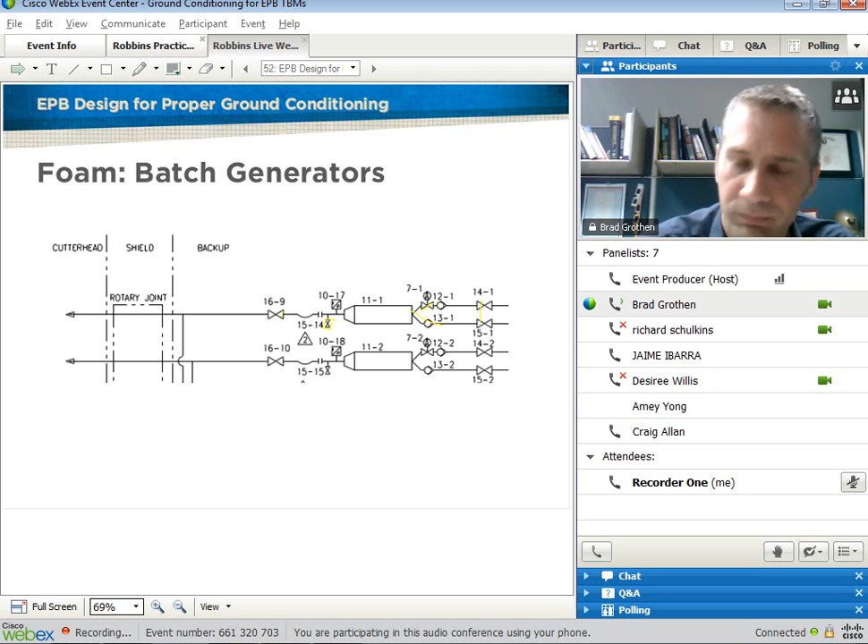The air side on both of them are going to be fairly similar. It's really the fluid side, down here, where the changes between the systems are most noticeable. In this case, we have an agent tank and water supply, which come together in an agitated tank on the backup. We can get very good mixing here, and good distribution of that agent in the water to form the solution is what we want to see. Usually this can be a pretty low ratio, so getting that distributed in the fluid is important.

From here, the fluid is controlled through a series of independent pumps - progressive cavity pumps or peristaltic pumps - so we have active control of the fluid flow. Some of the nice parts of this system are very good mixing, and a lot of redundancy built into the system. So if we lose one single pump, we still have the majority of the pumps able to compensate for maintenance on that one pump.

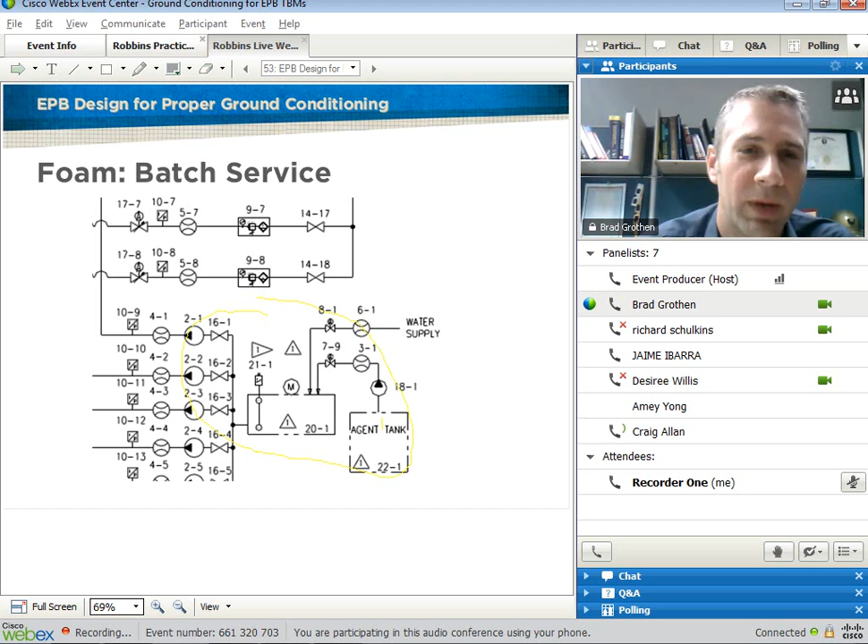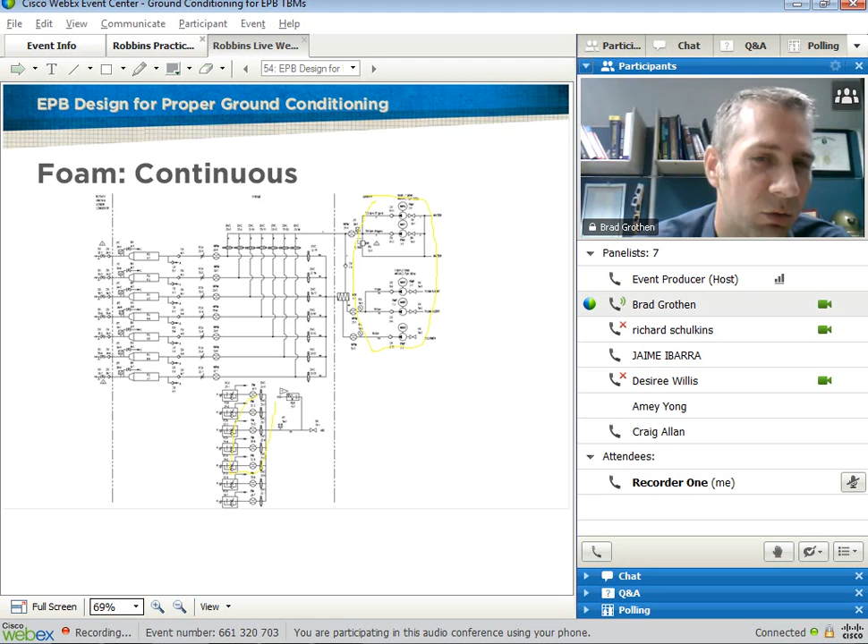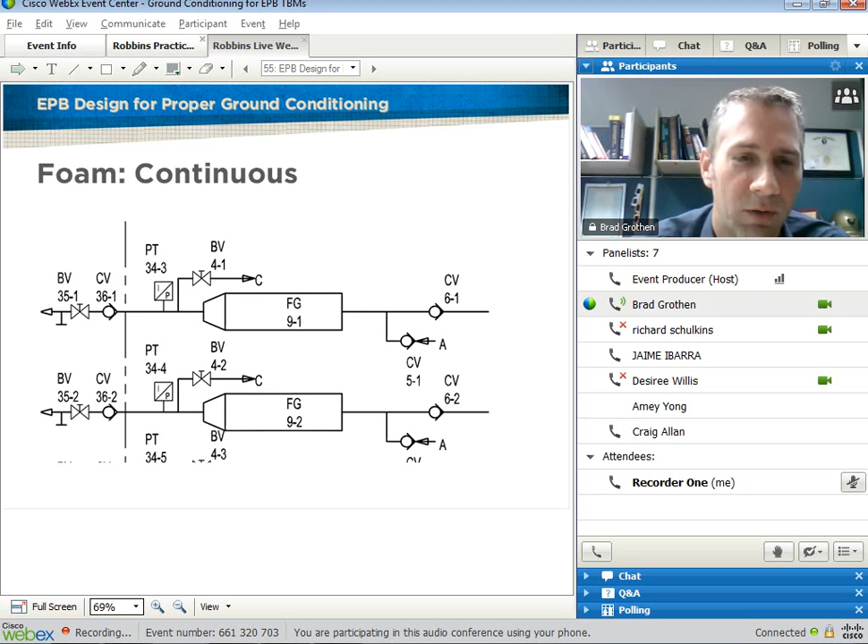So we have a lot of built-in redundancy in the system. Moving to the continuous system, you can see the schematic is laid out differently, but we still have our air prep and our fluid coming forward. We'll also notice there are a lot more valves, so we're trying to control the flow of the fluid. Again, from the foam generators coming forward, it's very similar. We have pressure control, our valves for isolation, and for testing the foam.

So the fluid system is where we see the change. In this case, we're trying to bring the water and foam agent together into a static mixer, and here it's continuously pumped forward. This has the advantage of taking up less room on the backup because we don't have that large solution tank we're pulling from. We're also able to change the concentration factor at any point during that process should the need arise.

A couple of items that we want to look for: inherently, there isn't going to be the redundancy in this system. So while we could supply a single water pump or a single agent pump, we want to tie a couple of these together. So if we do have issues with one pump, we have some duplication in the system.

Another couple of items we can see here that can be applied to either system is the ability to add water to each line independently. So if for whatever reason we want to shut off foam going to a foam line at the cutter face, that's going to subject it to plugging. We'd have a plugging concern. So we can just pump water forward in that case to prevent clogging, or if we have dry soil and we just want to add water to that line, this gives us the option of doing that.

We also have right here a polymer pump. As Jamie and Richard talked about, there's a wide variety of chemicals and polymers available to us. A lot of these can be run through the foam generator, and so if they aren't part of the foam package or the foaming agent, we can add them independently.

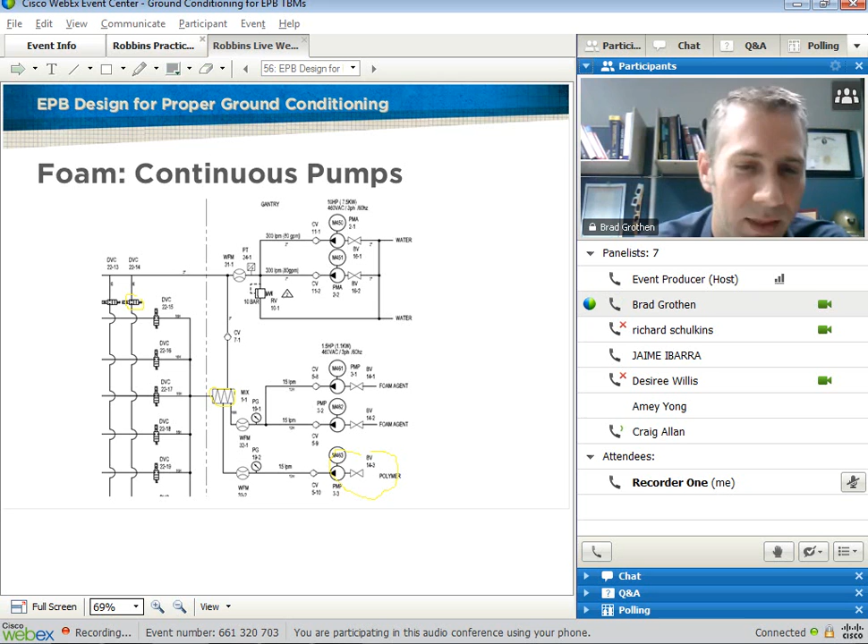A lot of stuff is going on. A lot of that control needs to come back to the operator. It's a critical part of the operation of the machine where we want to set all the different variables associated with the system.

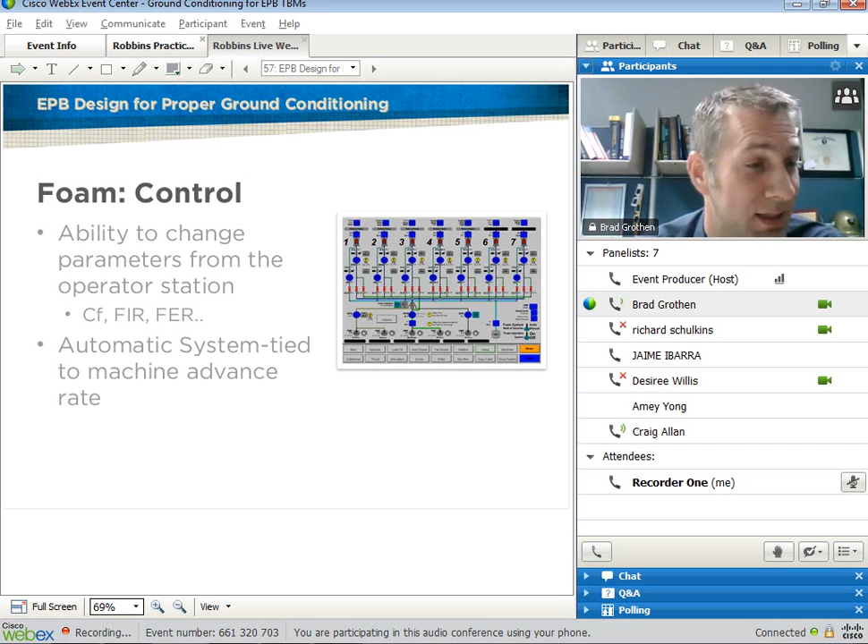It's also important that these chemicals are controlled with the advance of the machine. We set concentration factors and expansion ratios to a certain volume of soil. So if we double the advance rate of the machine, we're going to want those variables and the amount of chemicals we're bringing forward to stay consistent with that volume of soil.

So backing up a little bit, this really is a system. Each component is spread throughout the machine. The nozzles are at the face of the machine. It goes through a rotary union. The generators themselves we want located as far forward as possible.

Once the foam is created, especially as it expands, it's very important that we try not to damage that foam as it goes forward. We don't want to separate the air from the fluid. That leads to the air bubble that Richard talked about earlier.

The fluid pumps themselves, we have a lot more flexibility. It can be here, it can be farther back on the backup. Really, we get some additional mixing in the lines if it's farther back. So those locations should be dictated more by the logistics of the backup design than the pumping system.

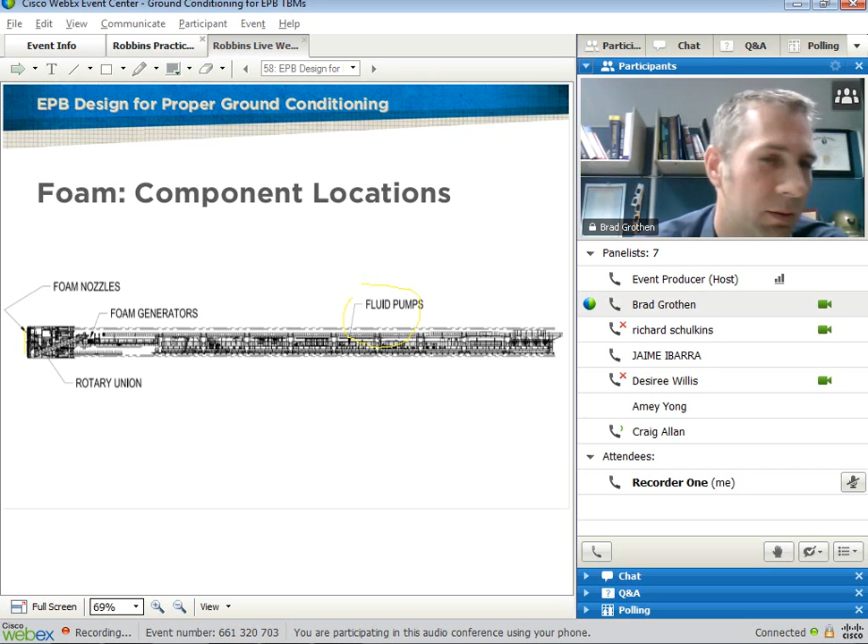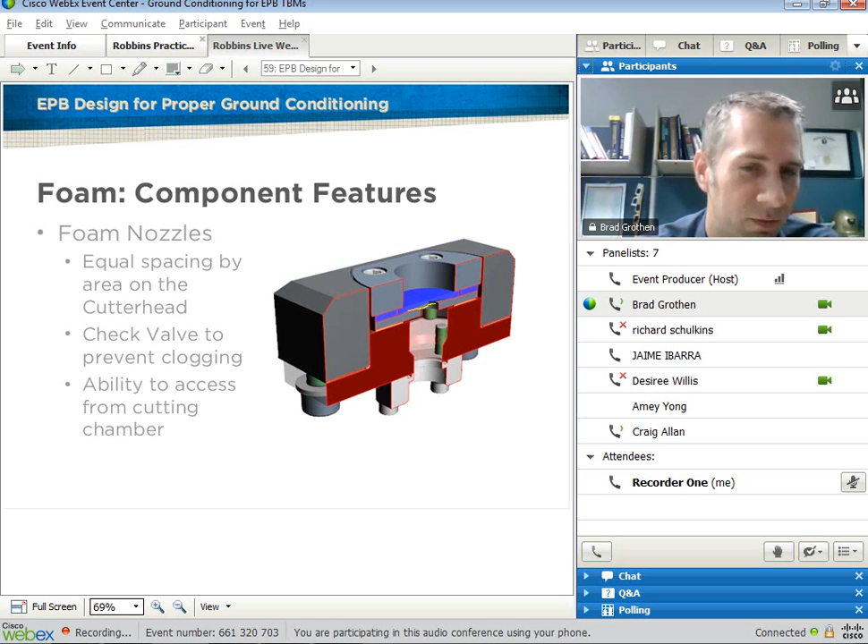Moving to the rotary union, we're missing a little picture here, but it really ends up being a pretty impressive piece of equipment. Each line has to be independent moving forward. We want to make sure we can control the flow to each line. If we try to tee the lines, we don't know where that flow is going, and we'll lose control of where we're distributing the product. We also risk plugging one of those lines or partially plugging both if we tee them.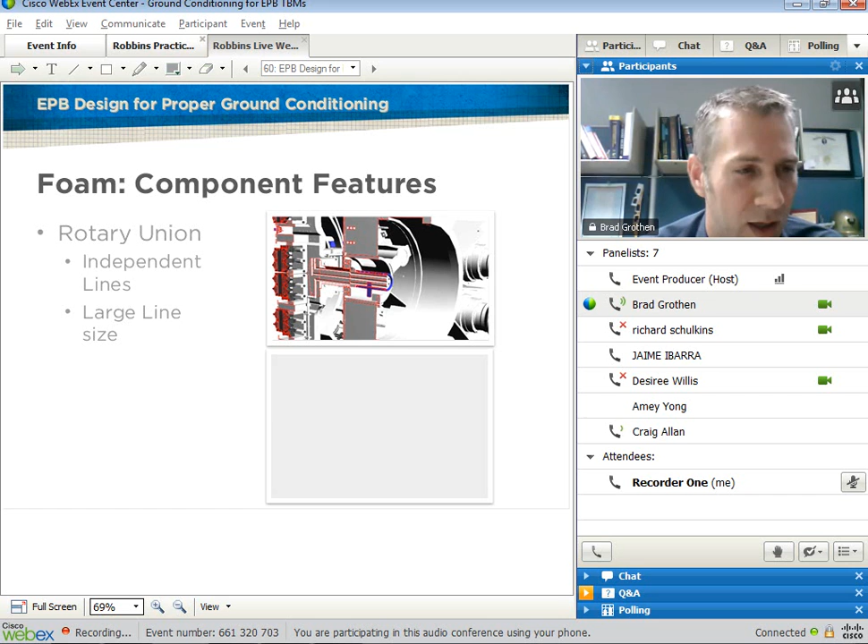The line size is important as we move forward. The smaller the line, the faster the velocity, and we're going to damage the foam, especially in the rotary union. Because of the size of the equipment and the difficulty of getting that machining in there, making sure you have a good line size going through that piece of equipment is important.

The pumps themselves should be of pretty high accuracy. We want good, consistent control of those systems. They should be positive displacement or volumetric, so a peristaltic pump or progressive cavity pump are preferred. We want to make sure we don't oversize or undersize the systems. Most fluid components like to operate in a 40 to 80% range - that's where they're most accurate. If we get way below or way above that range, we won't have the accuracy we want to see. They need to be appropriately sized for the advance rates we expect and the soil conditioning we want to see.

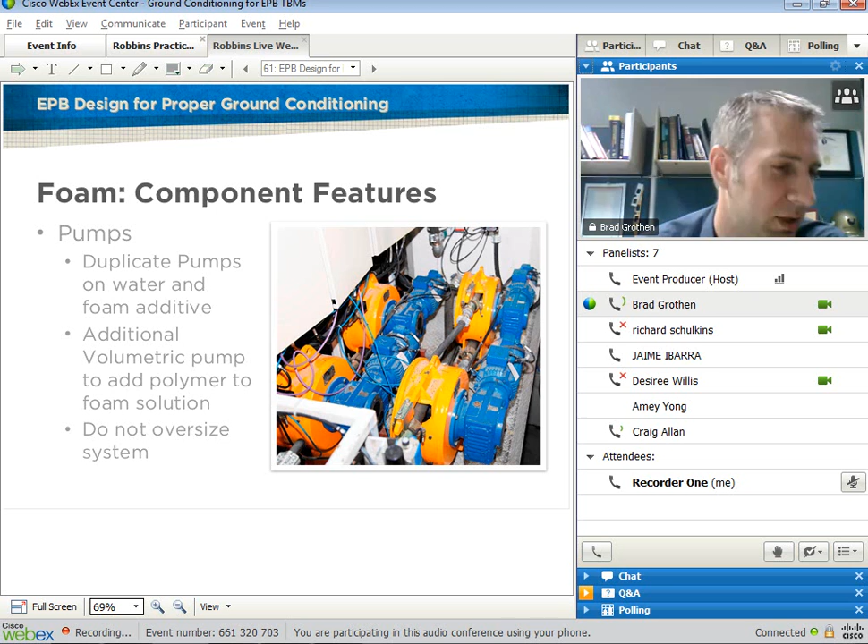So that's a quick overview of a foam system. There are additional systems that might be used for soil conditioning on the machine. Fine filler - we want to see a certain percentage of fines, usually 30% fines in the excavated soil. If they aren't natively in the soil, we're going to want to add them. This is primarily done with bentonite, though there are other options.

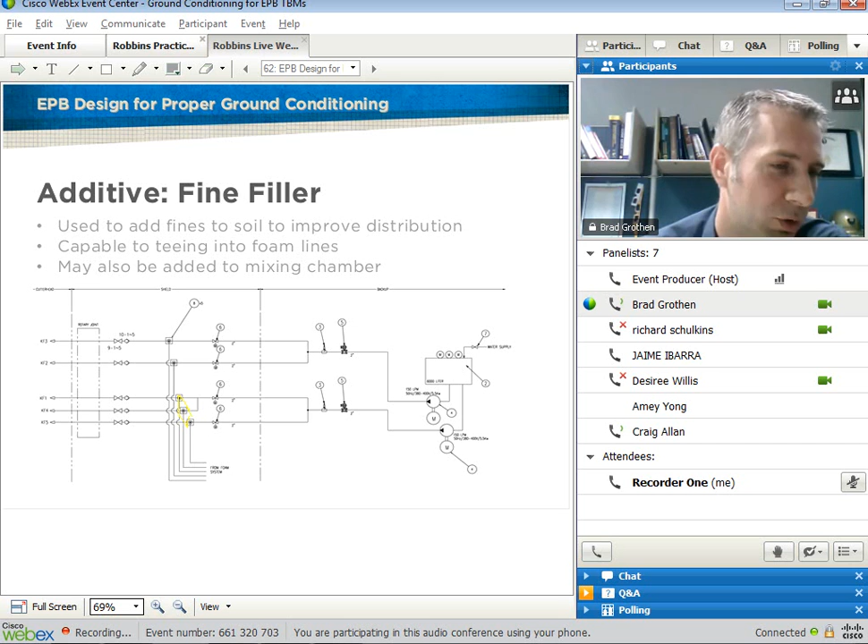This is a relatively simple system. What we can see here is how it is teed into the foam lines, which is an option. These can also be plumbed directly into the mixing chamber. This system can also be utilized to inject polymers, especially ones that aren't able to run through the foam generator. Some foam polymers will plug up the foam generator, so we want to inject them after it.

Finally, in many cases it takes one push to see the effect when we apply all the foam and soil conditioning in the space where we get the best mixing. However, in conditions where we don't have good control in the screw, Richard and Desiree showed a couple of videos where we had a lot of fluid just rushing out of the screw, so we didn't have good control. That requires us to inject material into the screw to gain control so the ground conditioning can take effect. So we want to have porting right at the entrance of the screw.

You can see that right here. This is an emergency system. It's preferable that we don't add chemicals there as standard practice, but it's something we want to have in place should the need arise.

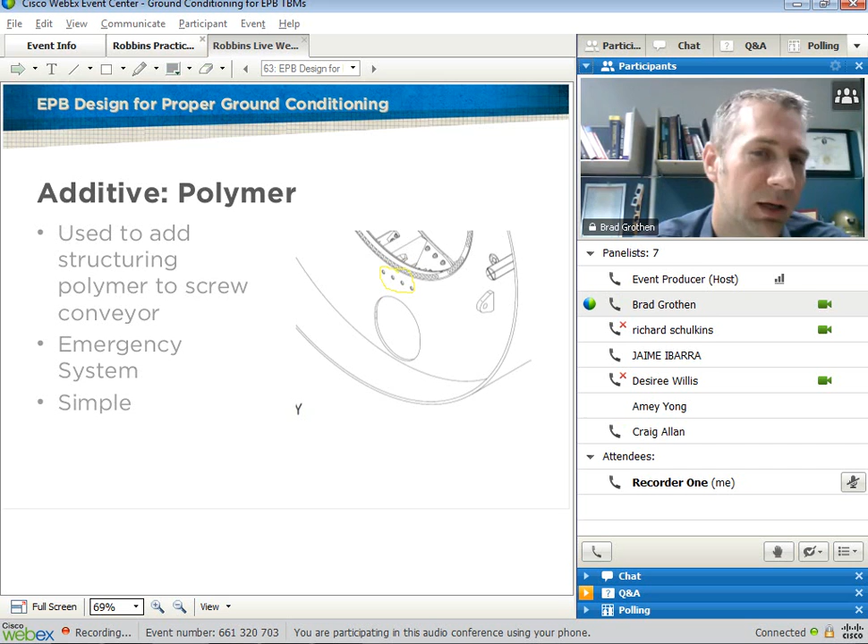With that, we're on to our final poll question. In your opinion, what has been the most important topic in today's webinar that you'd like to hear more about? A, ground conditioning as it relates to EPB advance rates. B, planning and testing in order to develop an accurate ground conditioning program. C, ground conditioning for mixed ground conditions. And D, TBM design to optimize ground conditioning.

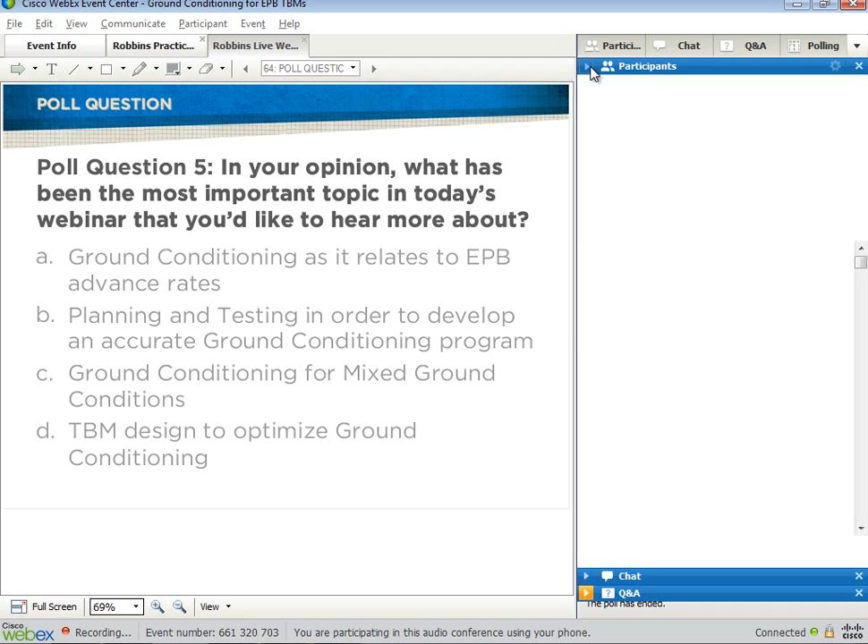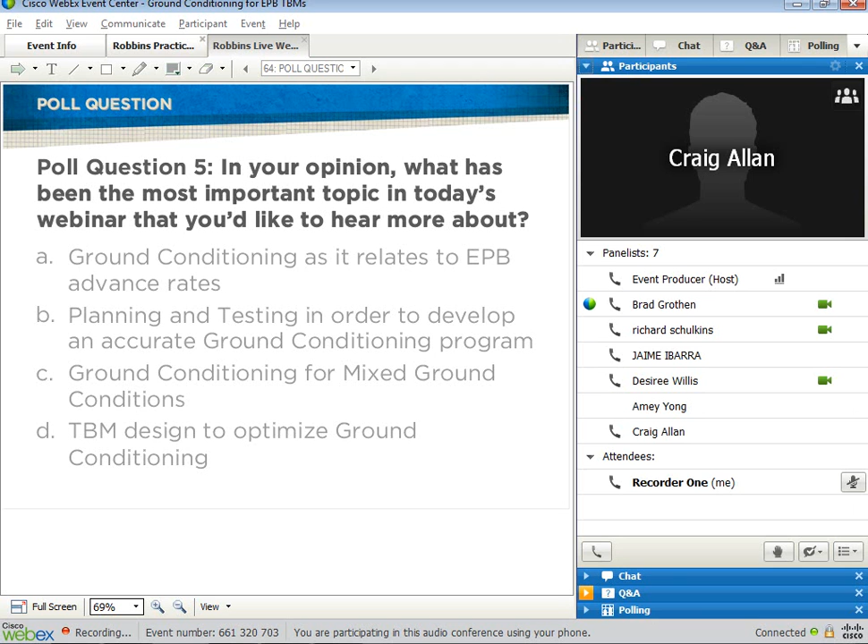So we have one question, I think this is probably for Richard or Jaime. Are there any new types of foams or polymers you're working on that you could tell us more about?

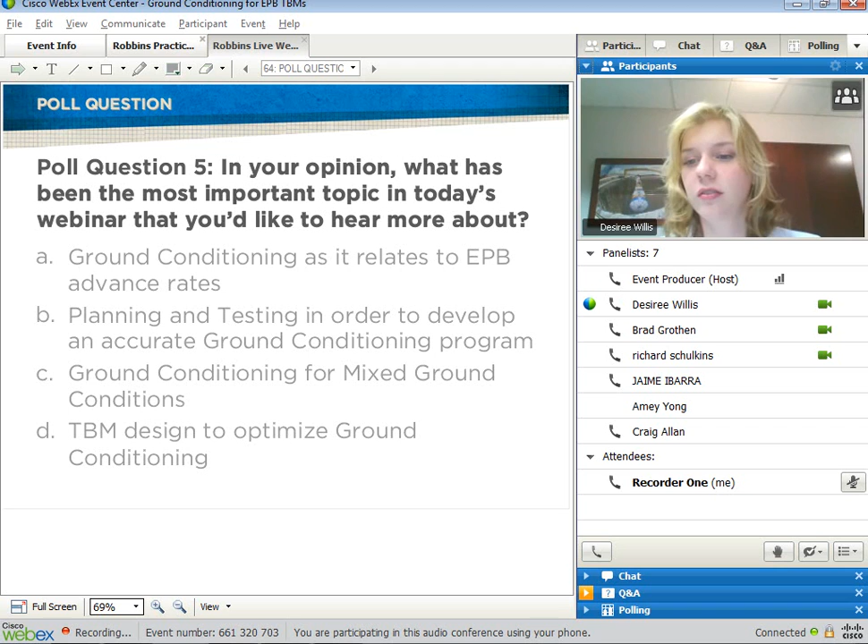Yeah, sure, okay, there are quite a lot. There are so many different products available to us. People tend to keep in mind only foam and polymer, but there are so many different types of foam and polymer, and also you've got to consider, especially with ground that doesn't have fine content, there's a whole raft of filling materials you can use in combination with foams and polymers.

There are so many variables, it's very difficult for a contractor to get their head around them. I know because they're unaware of most of them, and I hope this webinar at least gives you some indication that there are a lot more things you can actually try.

Well, to answer that question from my point of view, yes, there's always room for improvement. Soil conditioning has been on the market since probably the 90s. So always room for improvement means we always face problems on the projects regardless of the knowledge we can provide into the industry or what we believe we know.

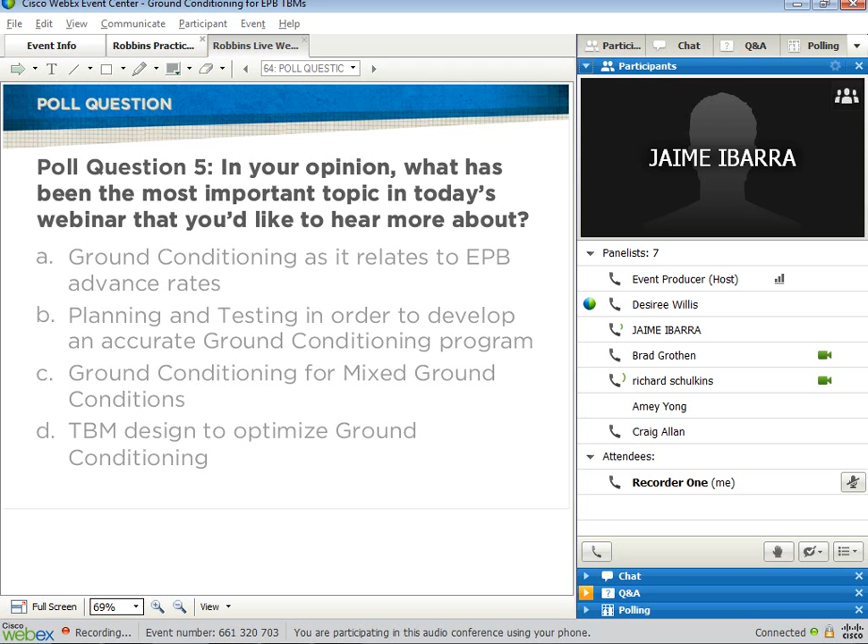Okay, great. Another question that I think Brad, Richard, or Jaime could answer. Which international ground conditioning guidelines would you recommend using as a reference?

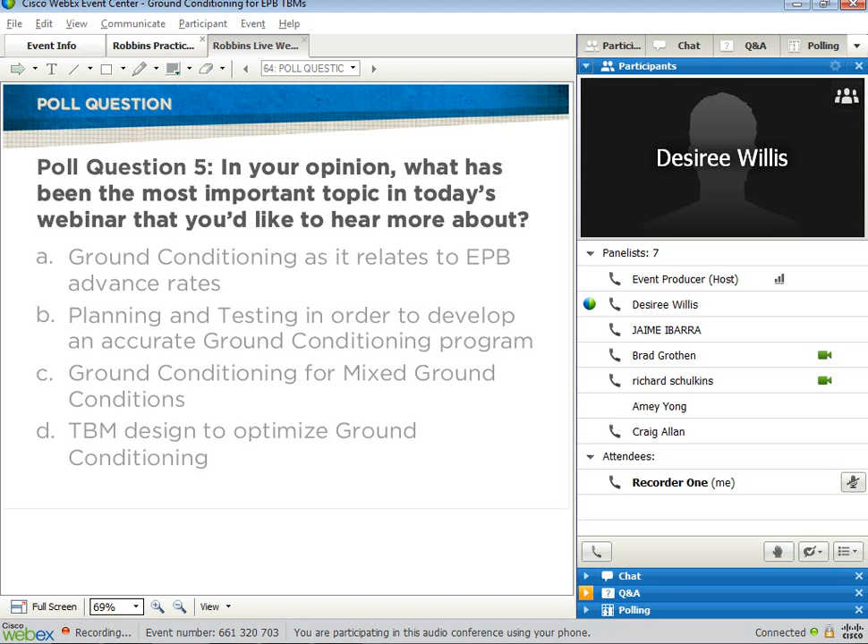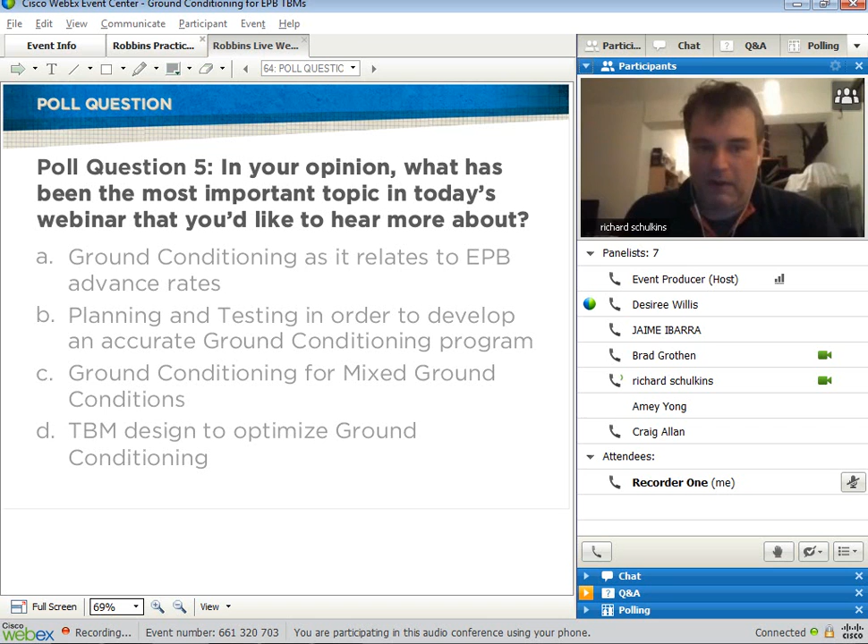Well, do you want me to go first? Yeah, sure, go ahead, Richard. Yeah, it's a tricky one really, because my answer is I don't think any of them. If you want to know, you have to do it yourself. There are some papers by a guy called Milligan. EFNARC doesn't really do what you want - it doesn't give you enough information to enable you to do a project. So I don't think there's anything actually available as a guideline or specification that's suitable to help a new project at the moment.

Yep, thanks Richard. My opinion: good planning for ground conditioning - we already talked about all the steps we need to do in order to have good soil conditioning. I agree with Richard - there's no 1, 2, 3, 4, and bingo you have a successful tunnel. It's always trial and error. What we provide as suppliers of soil conditioning to the industry is a reference point.

We have a very small amount of material to test with. We don't have a TBM in our labs, so we basically need to do the trial and error on the TBM. But we start with a good point using the technology you might be using - not necessarily the latest technology, but the technology you're using - which helps give you an idea of the quantities and the right conditioning of the ground, as Richard showed in some videos in his presentation, of how to change the condition of the ground towards what you need in your project in order to be successful and manage the ground you're dealing with.